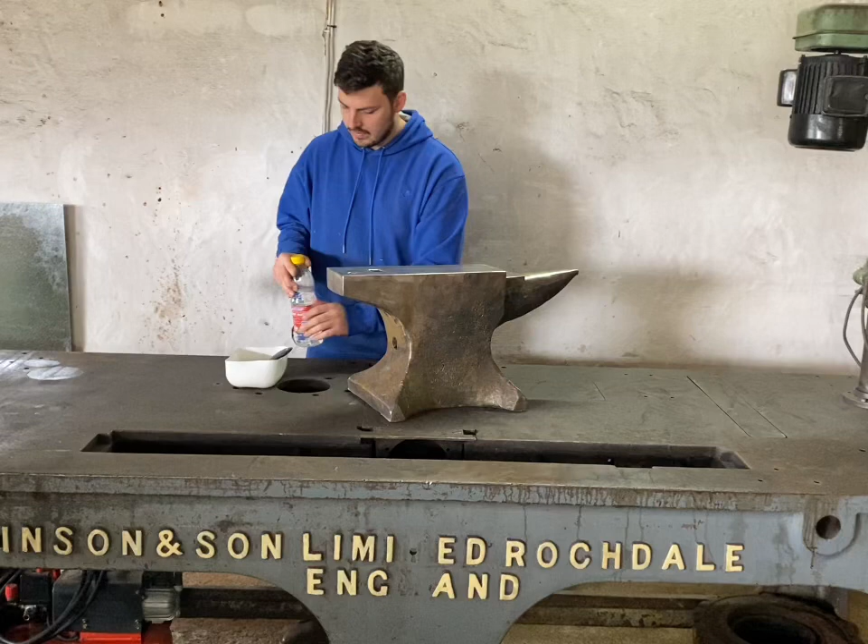My name is Kyle, and today you'll see the product of about 6 months worth of work. This is a Joseph Wilkinson anvil, and it started with me looking like this. So if you want to stick around and see how I accomplished this task, you're welcome to.

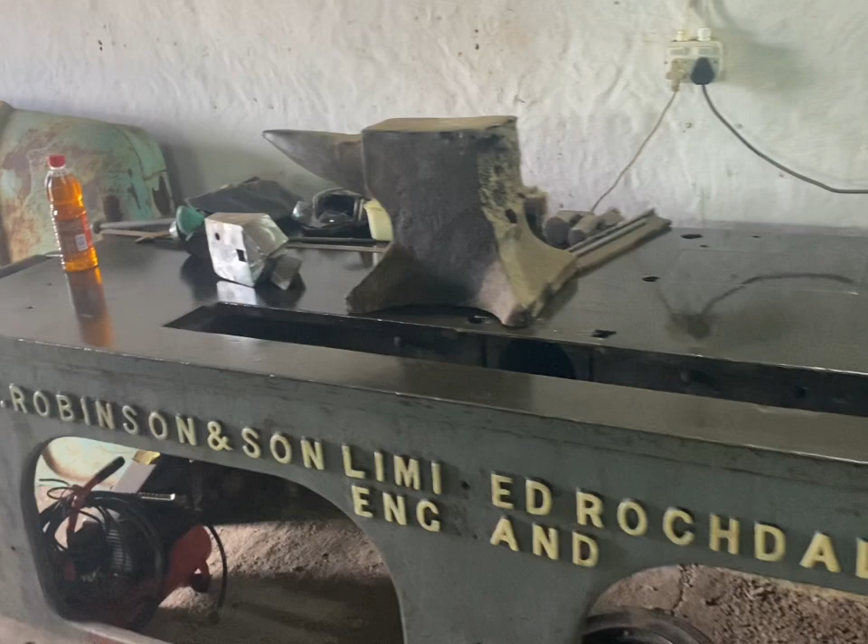So the table is all oiled, and this is 3 days later, and it's fairly dry. It's a little bit gummy in places still. You can see my fingerprint there, but can't wait any longer. So I have a little bit of time. I have an hour now before we finish work, so I'm going to just start to grind out all of this and prep these surfaces for welding just with a small grinder. I'm not going to do this here because this will require the big grinder, but I'd like to just see. I have an idea that there's some delamination in there, so I'm going to just work a little bit and see what's going on here.

I've got this deep crack. There was a crack that ran back here, and I've got that out now. But there's this very deep crack that's running from here, it's on this side here, and I've been trying to grind back to see if I can get rid of it, but it's actually now chasing back like that. So I think what I first suspected, I think that this whole piece is basically broken off underneath on the wrought iron. So I'm going to cut it back now here and then see if I can lift that off.

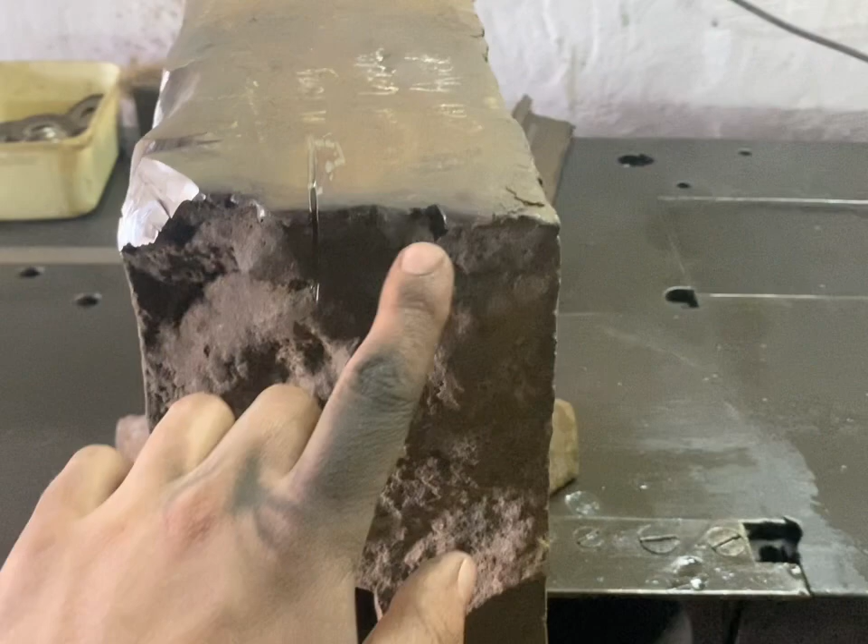This is the worst side here. This side, it doesn't look like there's too much delamination. It's just obviously broken edges, cleaned up over there. But yeah, this here has to come out, I think. So that's what I'm busy trying to get out now.

What I've done is I've cut through the faceplate there and there, and I've cut to the top of that crack over there and to the bottom there. So I'm hoping now if I chisel it from here, that part's going to pop out. I've never done a big one like this before, so we'll see how this goes.

See, it's definitely starting to pull forward. There, it's cracking, see, so it was all the way down there. So you can see how it was cracked on the wrought iron. The faceplate that was welded to the wrought was the only thing holding it on.

Now I'll just carry on grinding in here until I see that there's no more cracks, and then I'll be sort of happy here. But I think I might even have to come down a little bit more until about there. So I'm going to try and see now, because I see another crack. I also see that the crack is running quite deep in there, so it might be that this whole piece has to come out. I don't know yet. We'll have to obviously just carry on doing this and then see.

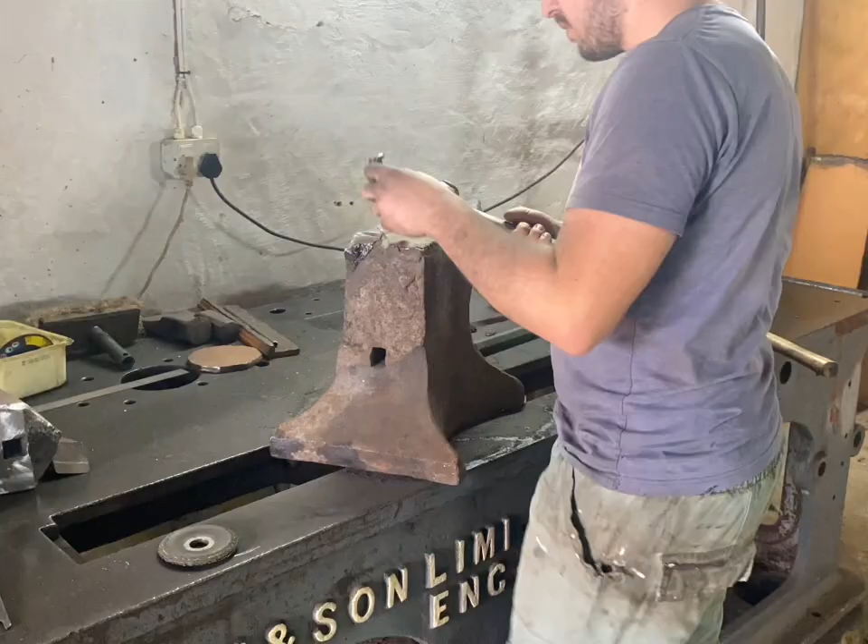But I think what I want to try and do now is I want to try and hammer in there to see if I can get this lifted off, even if it does mean that it peels off here, just so I can see how deep this crack runs. It seems as I was right. You can see there where it's starting to break away up to there.

What I did is I saw where I had cracks here, and I saw that I'd had cracks here, and I thought, well, it's very possible, just judging by the sort of angle of that break, and obviously we saw that there was a break in there, so I just guesstimated that the crack ran along like that. I don't have any special tricks or anything like that.

This is obviously a bit different. This is actually a break in the wrought iron. Normally it just has face delamination, whereas here the face is still bonded to the wrought. It's just that the wrought has cracked. So I don't have any special tips or tricks for you guys here. I'm just trying to see where the crack runs.

You can see now that it's separated a little bit, you can see where the crack runs. It runs along. It looks like it still even comes back into this more. So now what I'll do is I'll follow that crack over there. I'll get this off and I'll see where that crack is, and I'll follow that back. And I'll just keep on following it.

Sometimes, I know there's a guy in Canada that does this, half of the face comes off. And that's the thing with restoring anvils, you just never know what you've got. But if you want to do it properly, this is how you do it. So obviously all this has to be now built up with welding. It's a lot of work. Once you get going, it goes. But yeah, some guys are not cut out for this type of thing. Well, I love this. This is awesome.

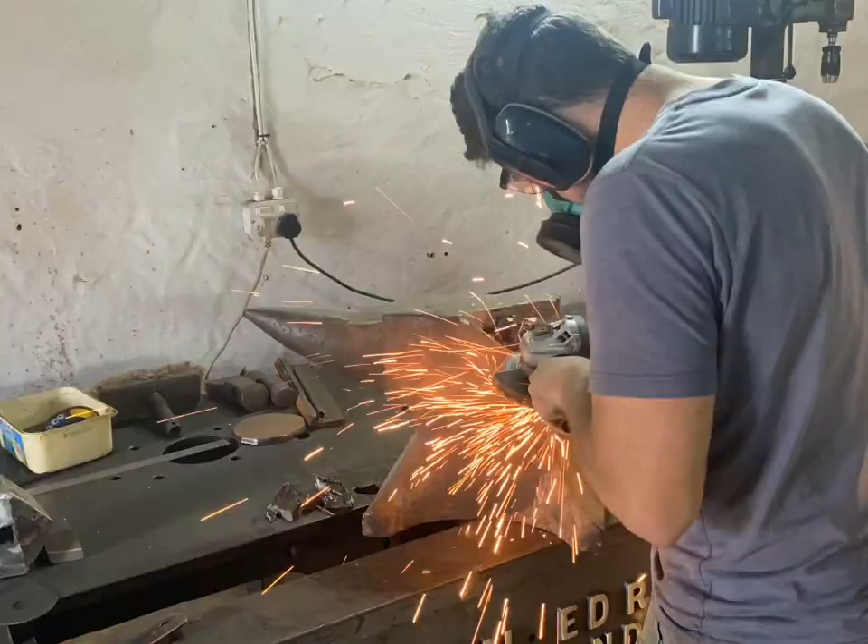Okay, so I think the last time you guys saw this, it was sort of around about there. I chased cracks. Not only cracks, because this is wrought iron, there's this flux, I'm guessing, that they use to forge this stuff, and I'll just grind and grind and grind to try and get rid of that flux, and it just seems that it goes further and further down. So I'm already, what is that, probably 3 inches, I'm guessing 75 mil down into the body of the anvil. So I don't know how much further I must take this.

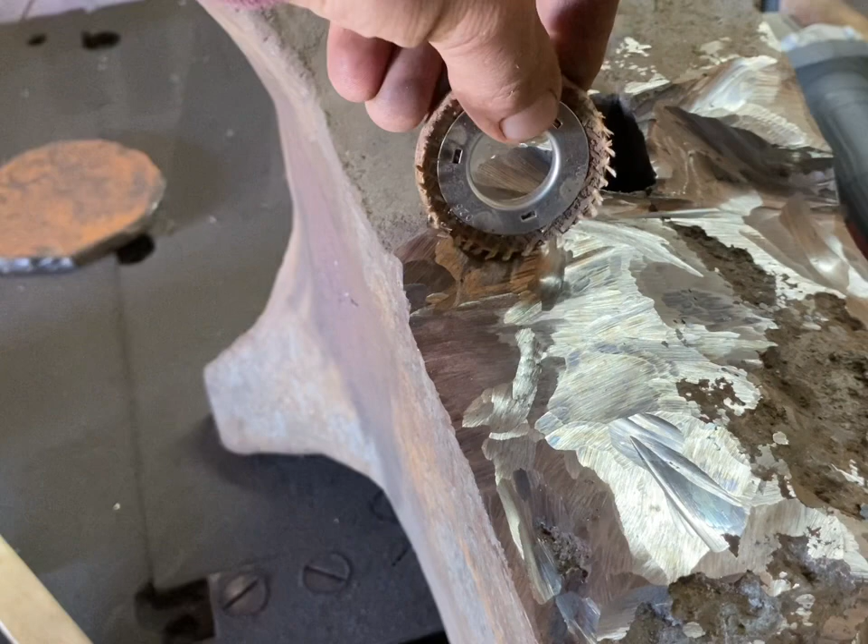So you'll see I'm using a whole lot of small little grinding discs, and I use them until they're that size. And the reason is over here in these little spots, that grinding disc fits perfectly in there if you work it back and forth. Whereas on a bigger disc, you have to take out a lot more material in order to get to the tight little spots. So like in there, you just put the little grinding disc and you just work it, and that's the reason why I use them. Same as over here, I'll use a small little grinding disc.

Just a quick one. What I'm going to be doing is putting this upright so that when I cut, I'm using the weight of the grinder to cut. I don't have to hold the grinder horizontally. I'll be cutting down vertically, and I'm going to be climbing on top of my table and just slicing it down. For those of you who say watch your back, I am aware of that. This is just going to be the easiest way. On the table, at least, I don't have to pick it up and down off here. Much easier for me to just climb up there.

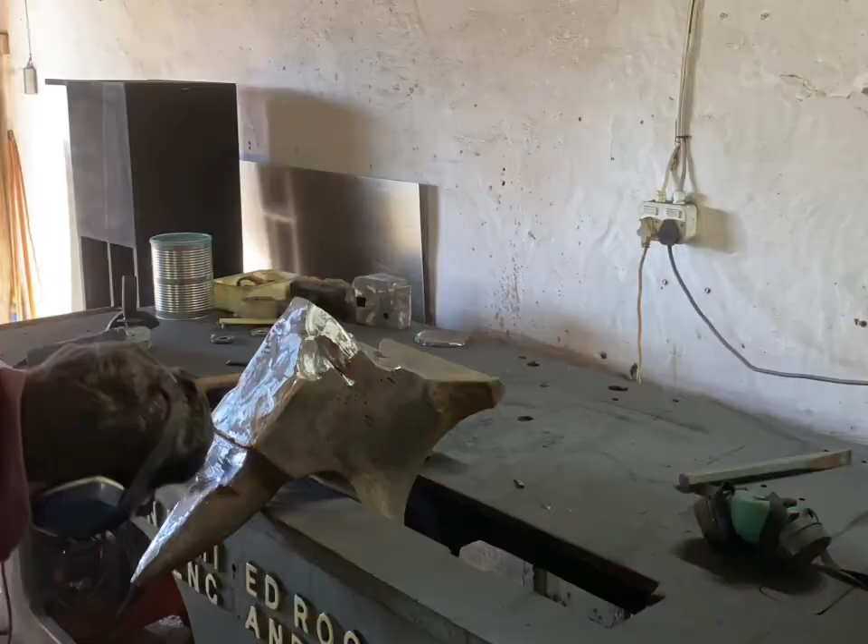Okay, so there you have it. That was a long process. That took me probably about 2 hours. I tried to work this one out a little bit more. I've got to the bottom now, but I'm battling to get in more, so I might just use a die grinder and clean that up so that it's clean steel. I don't want to carry on because the big grinder takes a long time, since I have to remove all this material in order to get in there, and my small grinder can't get there. Finish that up with a die grinder.

The face, I had cracks running inside the faceplate this way, so I just ground until they're gone. Over here I had cracks running down, so I ground until they're gone. And then the horn and the cutting table, that's all wrought iron. You can see there is a slight crack in the wrought. There you can see it. I'm not going to worry too much about it though, because that gets built up with normal mild steel. This doesn't get worked very hard. It shouldn't. So I'm not going to worry about that, because it doesn't look like it's too deep, and there's no point in me going down too much over here.

A little bit over here, those are just the bottoms of the chisel marks, so I've got to go down there a little bit more. But other than that, she's pretty well prepped. A lot of prep work. If you ever ask whether it's better to restore an old anvil that's badly damaged or just buy a new one, it's better to just buy a new one, or a less damaged one. But I do this because I don't see the point of putting this thing on the scrap heap. It hurts to think that this was made in the mid 1800s, and I don't think things that old should be chucked on the scrap heap.

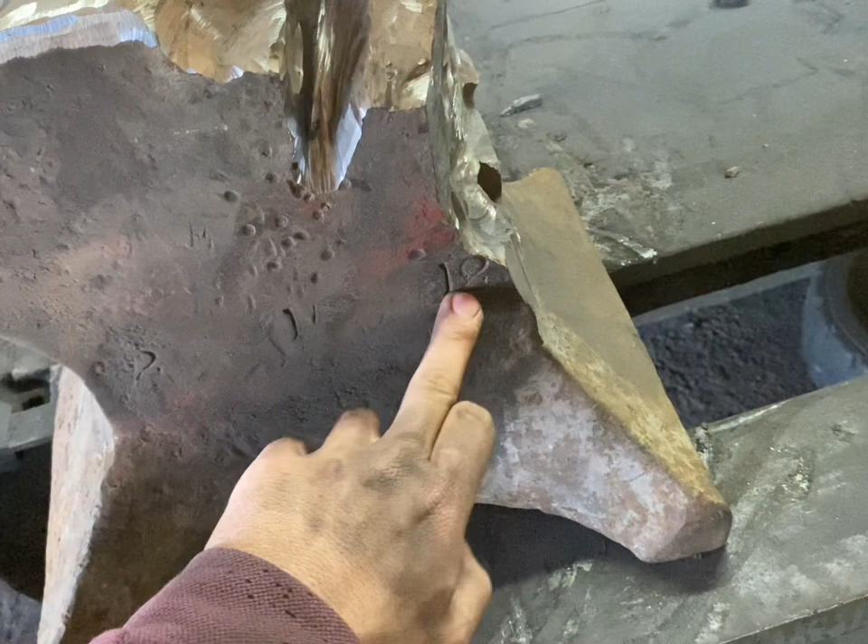But what I'm going to do is I might just leave that. And then if there's a bit of porosity there, so be it, you know, it's not structural. It's always best to just have absolutely as clean a steel as you can have for welding, because any impurities in here will obviously just cause problems. So, but yeah, that's it. Happy with the way that turned out.

How it's going to work is this will all be built up with mild steel, normal MIG wire, your standard mild steel MIG wire, because this you don't want to be hard. If you are going to be chiseling and stuff on it, you don't want to keep on blunting your chisel like mine is from trying to chip out on tool steel stuff. So you don't want to use hard facing here, just use mild steel. It'll serve its purpose. From here on, obviously all this will be built up with mild steel till the top over here. I'll explain that just now, and then all this building in here, all mild steel.

Okay, once I've got all the mild steel done, I'm going to be left with this stuff over here, whatever's going on here on the face, as well as the new heel. This, I'm going to try a new method. My welding supplier said that it's a good idea to do this. I explained this earlier on in the video, where this is quite hard already, but that is normal mild steel, so that's quite soft. All the building work is going to be mild steel, so that's going to be a huge chunk in here where it's going to be soft.

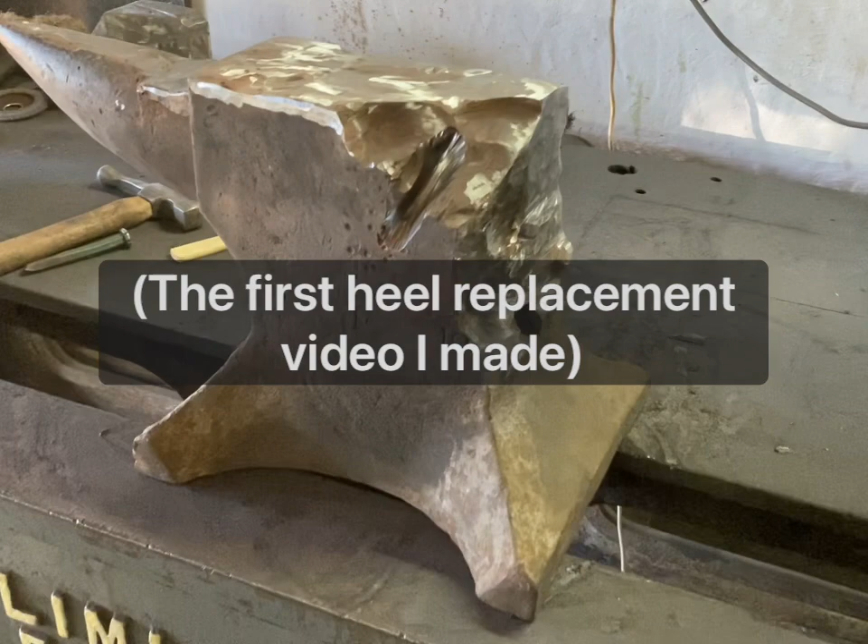So yeah, this anvil is going to be a little bit different to the last one I did. Obviously there's much more damage over here. This is a bigger anvil. I think this is close on double the weight of that other one. But there was a hell of a lot more damage. The other one was basically a clean break. I cleaned it up, there were no cracks, welded the new heel on. Whereas this one, I had a lot of weirdness going on here, and there's a lot of cracking. I think this could possibly be an earlier one, or the wrought iron quality is worse, because the wrought iron over here, there's a lot of cracking going on.

So I don't know. Wilkinson anvils are generally very good quality, but I don't know what they had access to back in the day. No judgment from me. They did bloody good work. 100 and something years later, their anvils are still around. We take it next door and start tacking everything together and laying it out and seeing if I'm happy with the shape.

Okay guys, this is the next day. Just in case you're wondering what all the writing down and measuring was about, I was just getting a halfway mark on both. The horn, I did double check it. The horn is in fact the middle of the anvil, and then I've drawn a line all the way across the halfway mark. The anvil is, how much bigger is it here? I think it's almost 8 mils bigger. Don't ask me what that is in inches, but it's 8 mils bigger on this side than it is on this side, which is fine.

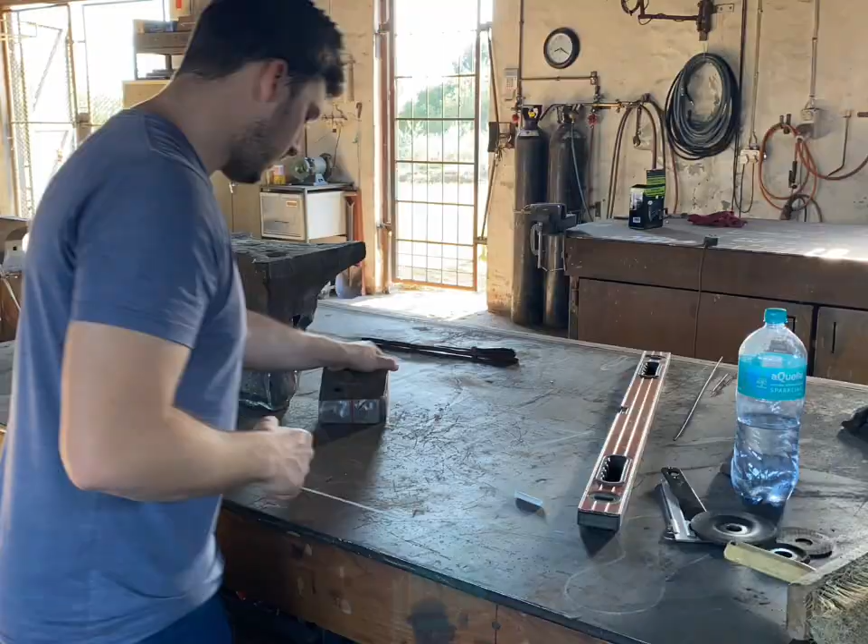Okay, so I'm ready to tack the heel on. What I was doing is I just took some scrap square tube and welded myself a square that I could obviously weld on and get all messed up. I just tried to see at first the gap between; obviously it's fatter here, the body, than it is at the face. So I was just trying to see the gap, and I thought, actually, you know what?

Let's rather make this level on the feet, because then once I grind the face, all I do is put my level on the face and check for level this way, that way, and then I know if I'm square with the feet. So I thought that'll be a good idea.

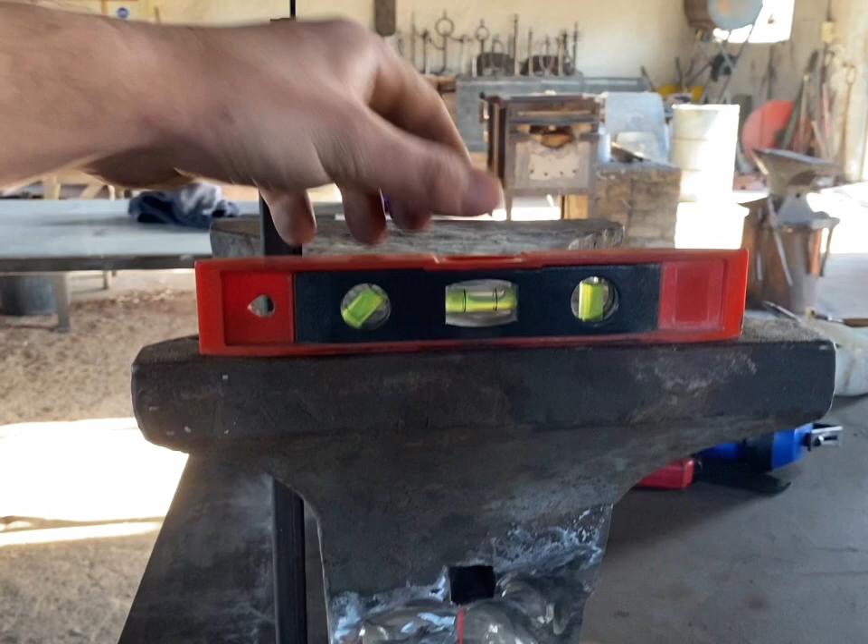So the feet are off, obviously, of course they are. This one is ever so slightly off that way, and this one is ever so slightly off that way. So I've sort of tried to get them in the happy medium. This is off, but let me show you. If I take this little spacer out, then it is absolutely perfect there.

And then that's perfect over there, but then this foot over here is out quite a lot. So that gives me two options. Either I could space it so that it's right in between in the middle, or I would have to take this foot down by 4 mils on the outer edge, which actually might be a good option, because then I've got this thing perfectly level. Let me give it a little bit of thought.

I think I'm going to just grind this foot down. There you go. See, this is why I talk to you guys.

Okay, so let me just think about this quickly. I think I'm going to mark from here to there, get a level line, and then see how much I'm going to have to take down on this foot. I've done this on one of my other anvils before, where the foot was way off, and I had to grind the one foot down. So let me just do this quickly.

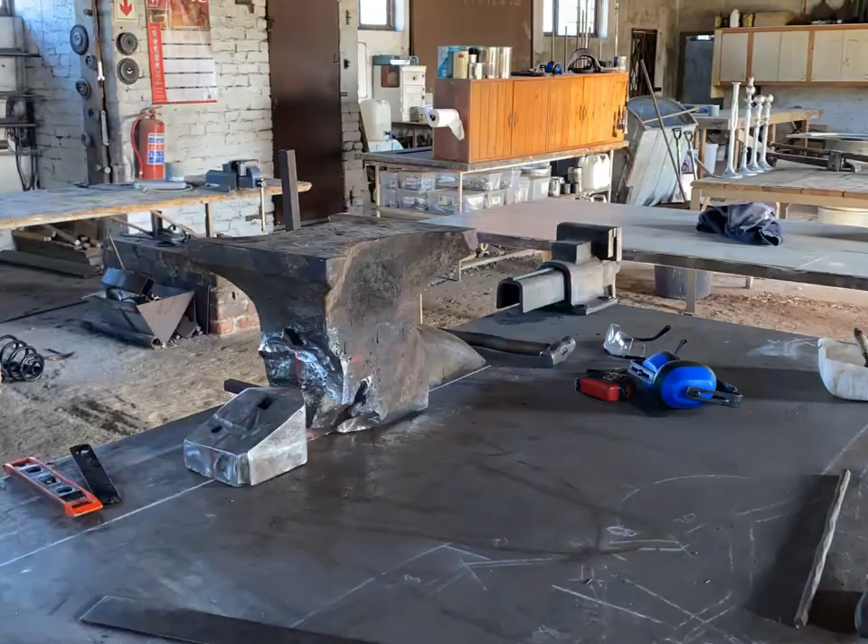There's the anvil from the top. See how much welding I've got to do there. Okay, so I just thought I'd show you quickly what I've done here. I made this little tool. It's basically just a piece of pipe that I've cut wedges in, and then I shove a piece of chalk in and break it off, so then I can trace along here. So anyway, I traced all that.

Took it down to the foot. The waist. What am I talking about? This is the important part.

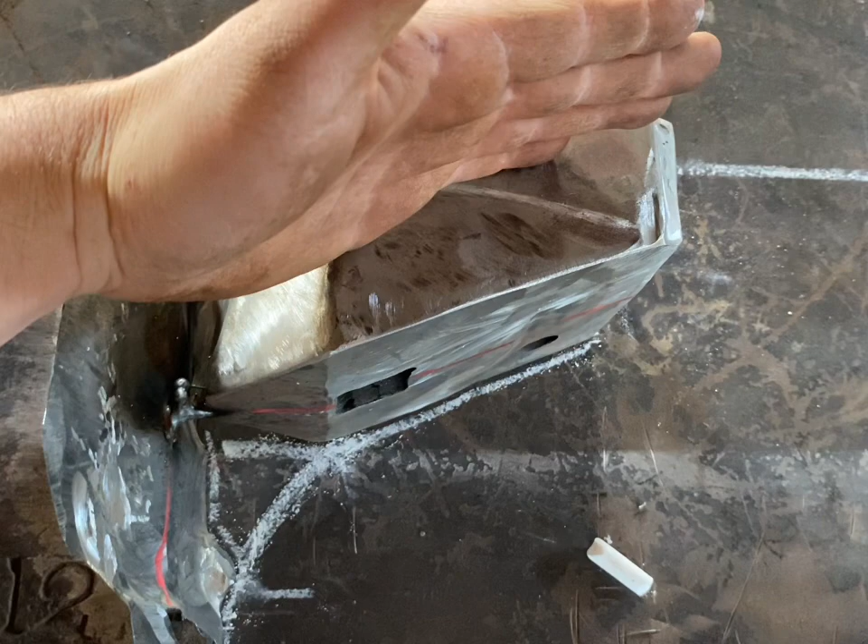Okay, so what I've done here, I traced up to here, to where it breaks off, and then I've just drawn myself a little line, because that's obviously the shape that we're going for. Remember, we cut the heel according to the sketch that we had on the big cast iron table. So I marked that, so I know that this shape is roughly what I need.

I might need to just grind it slightly in there to make it more rounded, but this shape is roughly right; that point over there is correct, and that point over there is correct. We might just need to take a little bit out there to give it that rounded, nice smooth look. So that is what needs to be filled.

Now, I have two options here. Either I can just start preheating this thing and welding it. As you can see, I still need to just grind that out. Haven't done that yet. Okay, so I can just preheat this thing and then start to weld.

Or what I can do is I need to chop this block down by 10 mils over there. So I need to at least sharpen that angle quite a lot and then bring it to about there, like that, you know. So I need to chop all that material off and throw it away. And then cut the heel off, preheat the heel, preheat this, weld that on. Then once that's on, weld it to the anvil.

Now, this is not very heavy, so I think that would just be sort of defeating the object. I don't know. It feels like I'm walking in my past footsteps here, because I try to do things a little bit differently with trying to escape so much welding. But at the end of the day, I mean, it's welding. So I think it's going to be easier for me to just start preheating and then just give it stick. Yeah, and then just fill all this up, because I have to fill all that.

So that's my thinking. Obviously, that over there, I think what I'll end up doing is I'll just come in with a big cutting disc, and I'll just snip that down and then clean it up. You can see over there, I've sort of dialed in where the high starts. You can actually see, look at that, where I've been dragging around on my table, the high. That one over there and that one over there is also a little bit, but this one over here is much more so. So that tells me that my theory is sort of correct. There is a high spot in here.

So what I'll do is I'll cut down and then I'll just grind that out. I don't think I'll ever be able to get it perfect. I don't have like a surface grinder or something, but I'll get it closer than what it is now. But that will come after everything else. Yeah, today I need to focus on this. So yeah, fun times. It is now 9 o'clock.

So I think I'm gonna just give this one more tack. I tacked it from the back, so I'm gonna tack it in here. Don't worry, I can definitely see that there's gaps there. Like I said, it was tacked from the other side. So I'll just burn that in there now, get that nice. Yes, I do have a gap there so that I can get a full penetrating weld. That's the whole point of doing all this work, is so that there's no holes.

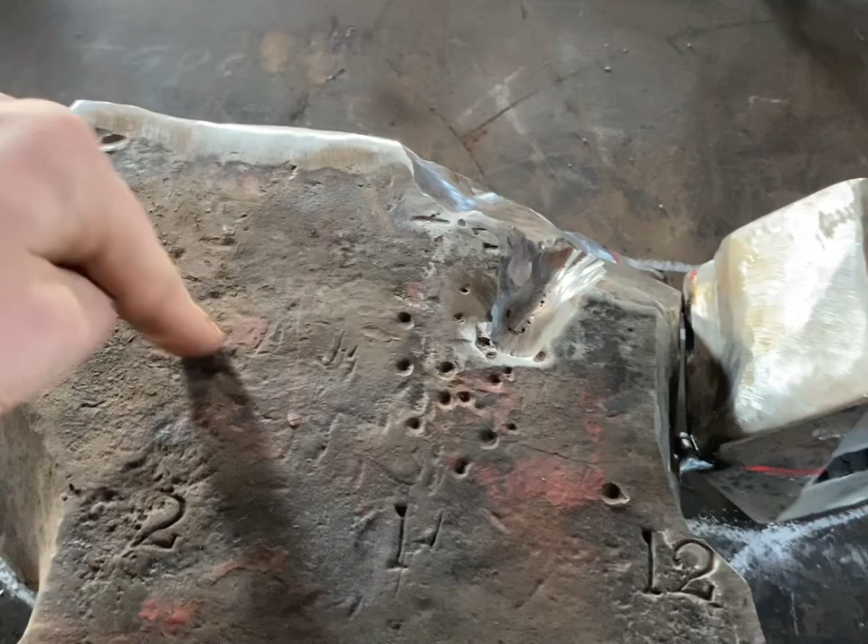You don't want any air gaps, as little as possible. On my welding, I don't want any air gaps. In this mass over here, guaranteed there are air gaps, as you can see, that are still in here, but as long as I can put out that my work is solid, you know what I'm saying? So anyways, cool. I'm gonna stop blabbing on. I'm gonna tack this, and then I'm gonna pretty much stand it up, get it set up on the table so that I can start preheat.

I want to just quickly show you guys what rods I'm gonna be using. Okay, so let's start with what wire we're using. This over here is just a new box. I've got a roll currently in my machine. This is just a 0.8 mil normal mild steel wire. That's pretty much the most basic wire that you can get.

Then second, we have this, which I've never used before, so I'm going to give it a bash. I've seen some of the guys in the welding group say that I can't use mixed gas, I have to use pure CO2. The only pure CO2 I have is food grade CO2. So if I really battle, I'm going to bring in my food grade CO2 and see if that makes it weld any better. But anyways, this is a stainless wire. It is a 309 buffer.

Guys, I'm not a welder. I can weld, but I don't understand what that is. So don't ask those type of questions. All I know is that I spoke to my welding supply store and I said, listen, I'm welding anvils. I said, they're wrought iron. He said, okay, that's fine. Do all your fill work with normal mild steel. Then underneath your hard face, do a 309 buffer, which I bought.

I will show you the settings on my machine. Last time you guys asked what amperage and what voltage am I welding at. The truth is, I don't know. So there my machine is. It's a 250 amp MIG. Pro MIG is the brand name. Your typical made in China type machine. I've had it for, what, 8 years now, and it's never given me any problems.

It'll give you the voltmeter and ammeter reading when I'm welding. Normally I just play with it. I know my machine. I know my car, I know how much I can go on an empty tank. So basically I just know my machine. I know that when I'm welding heavy stuff like this, thick stuff, I need to be around about there, 5. Normally what I do is I up my voltage slightly and then I'll leave my amperage about there. I might even go to 5.5 over there, and then I'll boost my voltage up to 6.

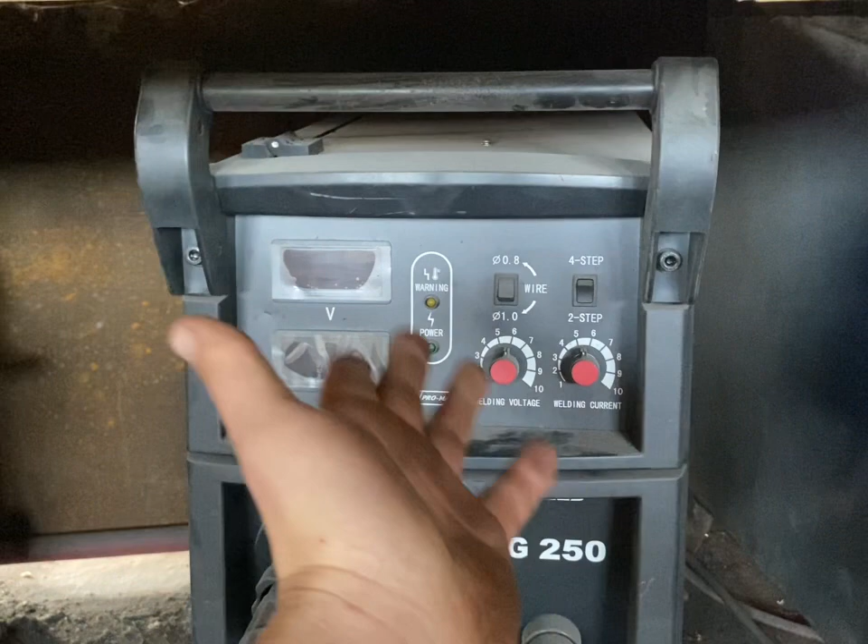Wire speed, guys, that's my controls. I don't know what wire speed it is. As far as I understand, it adjusts the wire speed accordingly. I have a switch over there to say what wire I'm using. So obviously I'm using 0.8. 2-step and 4-step: I'll be welding on 4-step because then I pull the trigger and it auto feeds until I pull the trigger again. 2-step is when you pull the trigger, it feeds. When you let go, it stops. Because I'm going to be doing a lot of building work, I don't want my finger to cramp, so I'm going to be going 4-step. But I'll show you all of that when I'm actually welding.

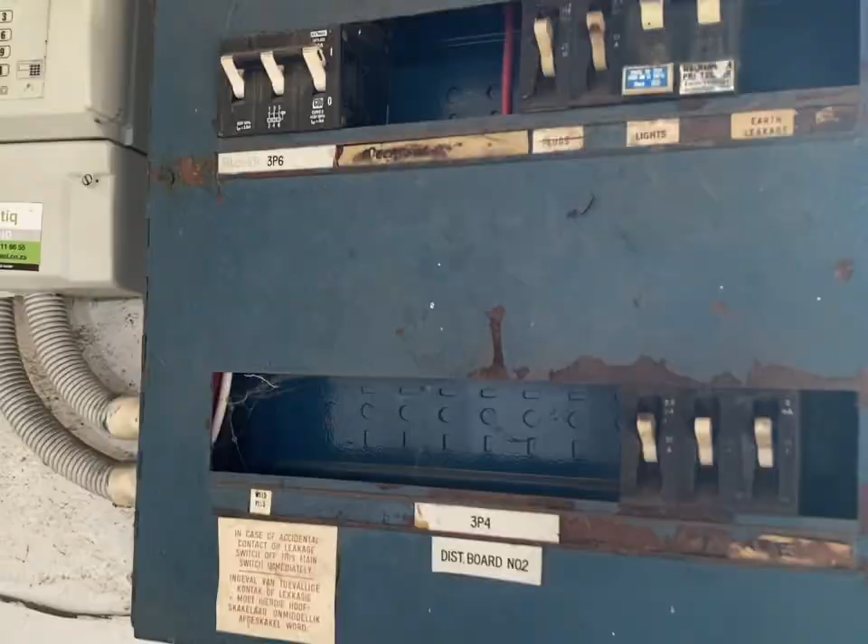Another thing I thought would be cool is showing you how much electricity I use. Because I'm here alone today, I have everything off. I don't have any lights on, nothing on at all. So I have 100 units of electricity. I think this is pretty much standard, so you guys will be able to figure out how many units you use. We are obviously 220 volt. I know in America you guys are 110 volts. I think the units stay the same. I don't know, you'll have to comment down below and tell me. So we've got 100.1 units.

Kilowatt hours. Okay, so I will video after all the welding is done, and then we'll see how many units we've used. Then you can figure out how much electricity costs in your area and work out the total cost of repairing an anvil in your area. Thought that would be quite cool.

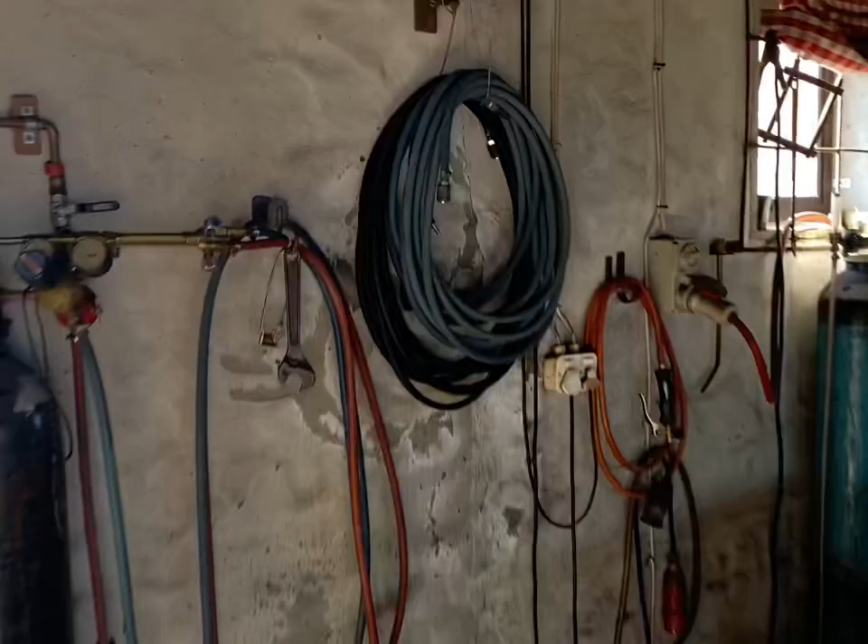For preheat, you can see we've got gas lines over here. Our gas chamber is outside, where we've got LPG gas, the big 48 kg bottles. For preheating my anvils, I have a hose like this with a male and a female clip on it. I clip the male side into this regulator, I open it up, there we go, I've got my gas. Then I plug this torch into the female side, and it's just your normal conventional trigger torch. I put it in a vise, and then I open the gas all the way. For measuring, I use a little digital gauge you'll have seen in the previous videos.

I'll use it again today, and that is how I measure the temperature. I want it to get around about 200 degrees. Keep in mind, obviously we have a crap ton of welding to do, so it is going to warm up. So I might warm it up to about 200 on the heel, because obviously it does differ,

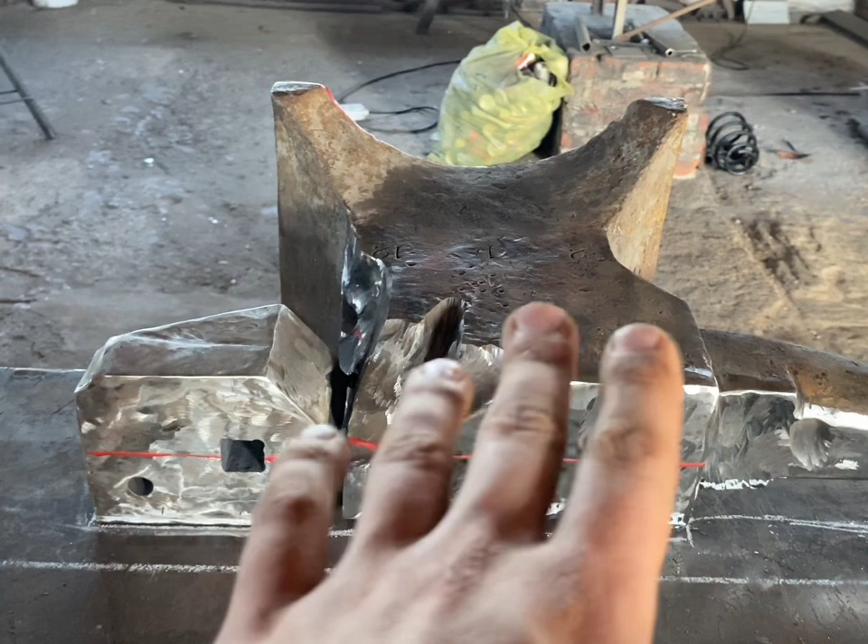the temperatures. When you're heating it up, the body is always colder because obviously it's a huge mass of steel. The heel and the horn heat up quicker. So I focus my flame on the body. Then when it's cooling, the horn and the heel cool off quicker, and the body stays warm for a lot longer, again, because of the mass. So I have to just keep that in mind.

So what I'm going to do is I'm going to heat up the body to around about 200. If it's like 180 or 170, it'll be fine. But the problem is that when I heat that up, the horn and the heel are going to get hotter than that. So I don't want to overheat the horn and the heel. So basically you'll see I always take 3 readings, 1, 2, 3, and then I just see what all the temperatures are, and I can't say to you that it's critical how much preheat you're putting in.

All I know is that obviously you need to preheat it because you need your welds to penetrate, especially into your wrought, really well. So yeah, even if I have to preheat the whole body until maybe 180, and then I just heat up where I'm actually going to be welding, and then I can start welding. Because once I start welding, then obviously all that heat is transferring into both pieces.

You'll see I might need to take a break here and there. I don't know if you'll see it in the time lapse, because obviously it's time lapse, but I will take a break if I see it getting too hot. Then I'll let it cool down a little bit, and then carry on welding. Generally, I don't really need to, because the heat transfers through quite nicely.

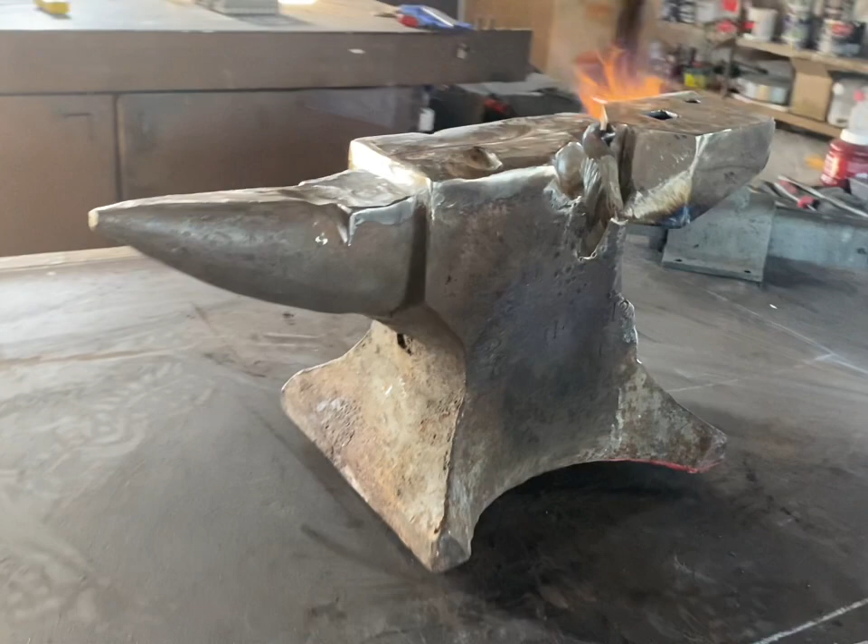Okay, it is a little bit hot from transfer, but I can still touch it, it's not going to burn my skin off. So I haven't concentrated any heat on the horn yet, because that'll be last. I will put a bit of heat on there just so that I don't get any major differences in temperature between the body and the horn, as obviously the horn is forge welded on, so there's always a possibility of breakage. Basically, I just keep on moving around like this. Letting the vise loose a little bit.

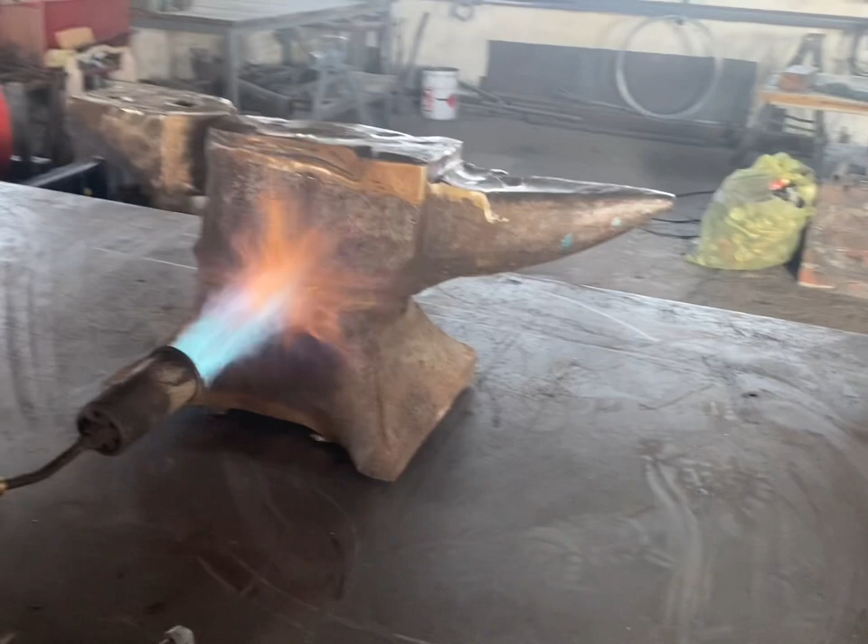There we go. Sorry, I'm trying to do that one hand. Anyways, yeah, I'll take a few temperature readings, and when it's about there, then I'm gonna give it a stick. So you'll see right at the beginning, it's the same as the other anvil. I'll do a pass here, and then flip it over, and then another pass, and I'll just keep on flipping it over so that the heel doesn't pull either way. Once I've got, I don't know, 10 mils worth of welding, it's not going to pull much anyway, so then I can start actually filling.

On the other side that I'm heating up now, we're about 140, and then this side we're about 160. So we are getting up to temperature. I think I'm gonna take it to about 180, and then I'm gonna start welding.

The temperature, I thought I'd try and show you guys. So that's ambient temperature, 24 degrees Celsius. Let me see what's Fahrenheit. Okay, so it's a 76-degree day today. It's quite warm. I am gonna test this in both. So let's see the body.

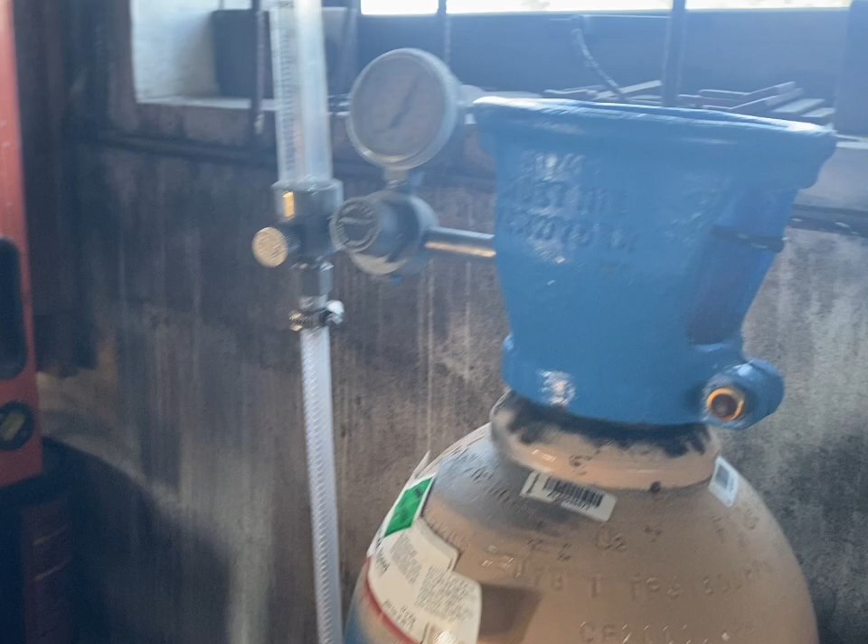What I also wanted to show you guys is gas. Okay, so normally when I weld, my gas flow is right around 10. You can see there, it's right around 10. I am going to boost it up to 15 just for these first few welds. I'd rather have too much gas flowing down

into the bevel. Because it's hot, obviously. Like I said, I'm not a qualified welder, so I don't quite understand the theory of how everything works. My idea is that the anvil is hot, so naturally it's going to want to push that gas up. So I'd rather just have more gas so that I get a good insulated weld, especially there in the bevel. Once I've started to weld, then it should be fine. But anyways, I thought I'd just let you know about that.

All right, I'm going to try and struggle with this thing now. Put my gloves on, put my welding coat on, and I'm going to try and struggle getting this thing down so I can start welding. Okay, this way you guys will be able to see my voltage and my amperage while I do my first pass.

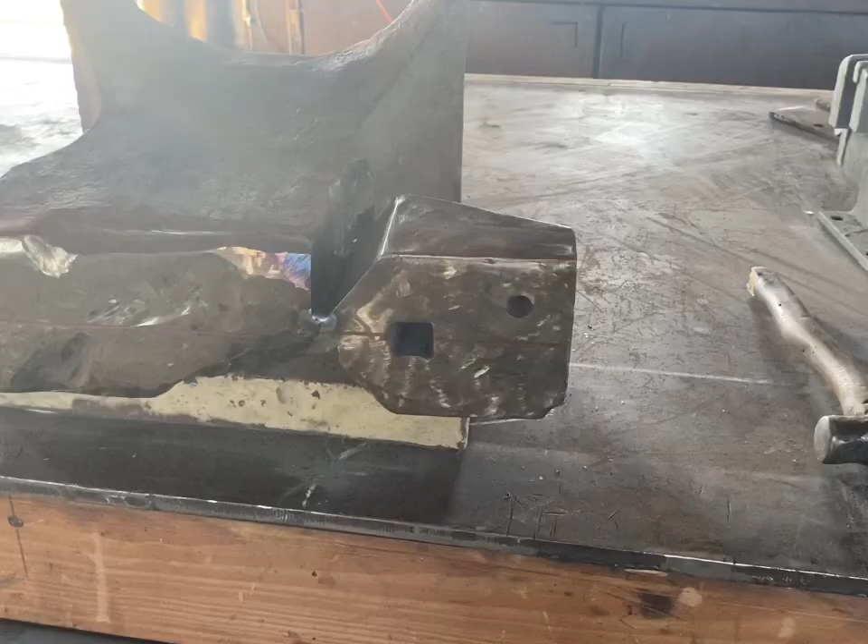Okay, so there's my first pass. Not great, but not too shabby. A little bit of porosity over there. I'm going to flip the anvil over now and then do the other side.

Thought I'd just show you what that weld looks like from the back. There you go. So you can see it did drip through a little bit. So now I'll wire brush it, and then I'm going to give it one on top. And from there, I can trust that it's not going to pull too much. So then I can start welding up.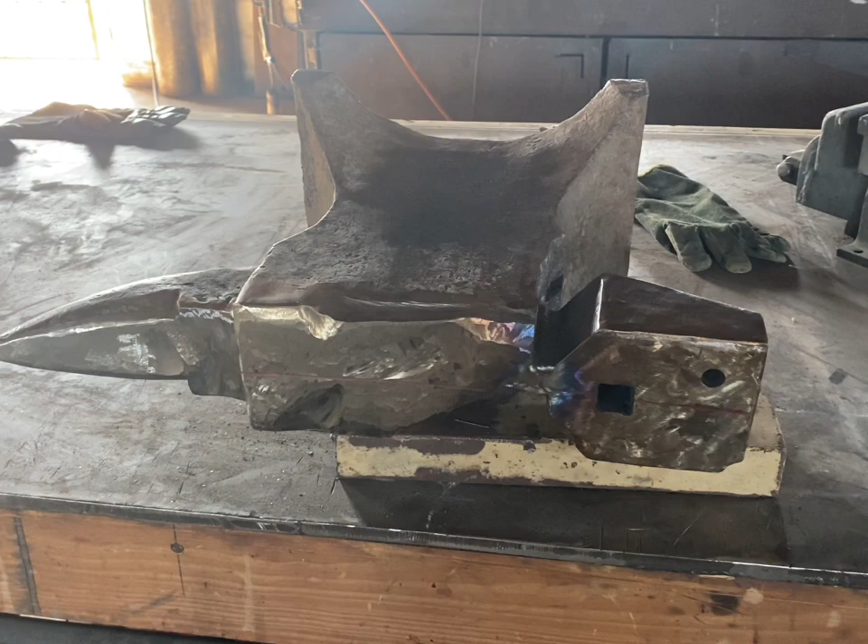So I'm just going to do little snippets in between. You can see the machine is welding really well at exactly the same settings that I had it earlier. Yeah, got about 20 mils now, so that's cool. I'm going to just carry on filling it up, and I'll just take little clips in between. It's pointless me doing this whole thing in time lapse. I'm just gonna kill my battery and the video is gonna be way too long on YouTube. Pretty much any of you guys that are wanting to do this know already how to weld, so I don't need to teach you on that.

All right, that's the one side done. As you can see, I built up the whole heel just by about 5 or 6 mils. I think it's about 3 or 4 passes, just because obviously the heel was quite a little bit smaller than the body over here. Sorry, the lighting's pretty bad. There you go. We have built up, and then the last, I would say 3 layers, I've just done a weave, just building everything up. So there you have it.

It's coming together. Now I've got all that junk to do, so that's probably going to take me a while. It's now 11:45, so that'll take me until the end of the day basically. I have to do that first before I can do this, but yeah, that might have to be tomorrow's job.

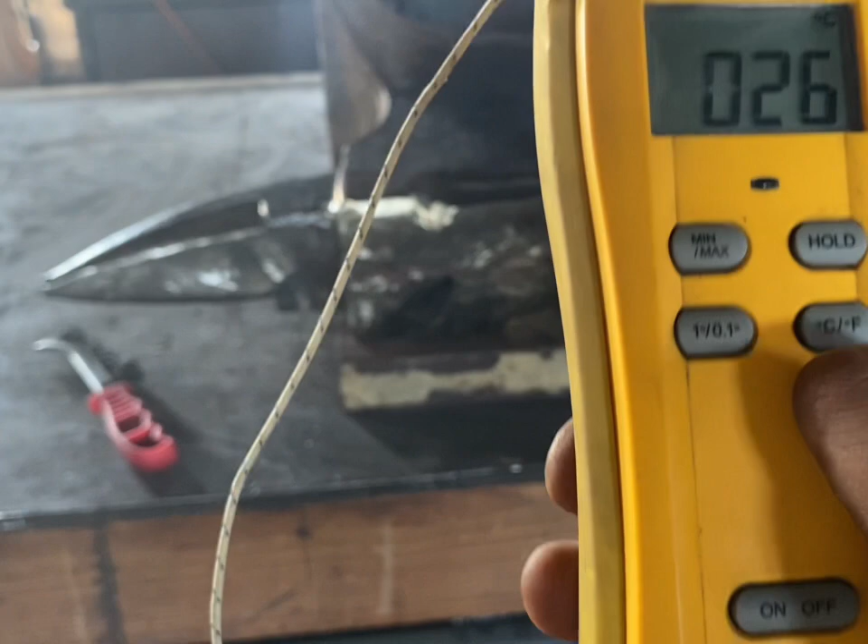Okay, so here's ambient, 26 degrees Celsius or 78 Fahrenheit. So the heel, like I said, is quite hot. I don't need to really watch my heat on the heel because that is 260-ish, 265. So the body of the anvil is actually quite cool, you see. Have a look on the horn.

So I went to have a little bit of a lunch break, and I came back and I did a few welds, and they're fine. The welds are taking well, but I thought it just felt a little bit cold. You can sort of tell the way your welds are adhering as opposed to the way they were before. So I thought I'd just put a little bit more preheat in the anvil.

I did measure the temperature, and it's around about 100 all the way throughout. So I want to get it up maybe just by about 50 degrees, and then I'll carry on welding, and then it'll obviously keep its temperature. So, but yeah, there it is.

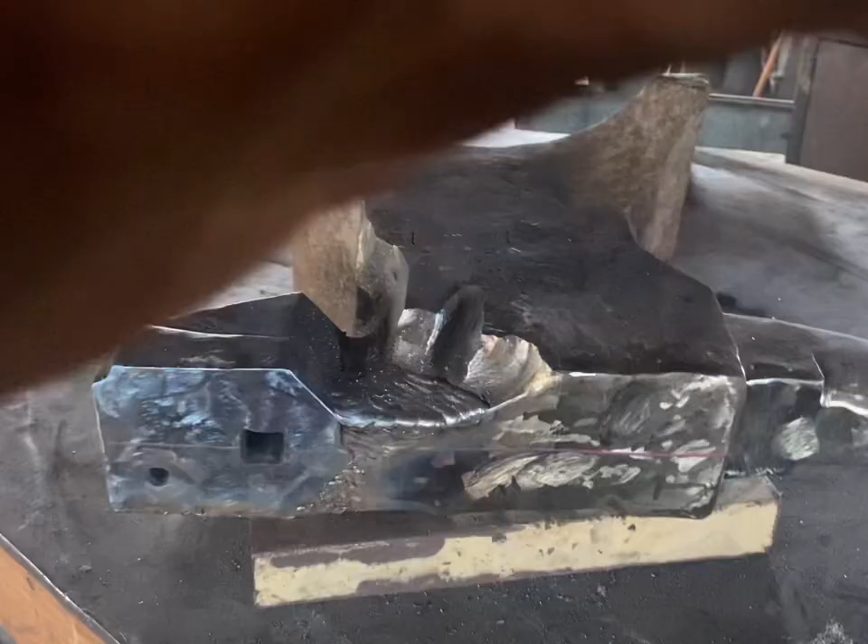Starting to look like an anvil now. Once all that's filled in, it'll really come together nicely. It was the same on the last one. It sort of looks like, what the hell's going on here? As soon as that's filled up, it changes the whole perspective. Let me just see. There you go.

Okay, so we're getting there. As you can see, I've filled in there, and then I'm just trying to keep it all at the same level throughout so that I'm building up all together. I don't know if that makes sense. The lighting is pretty bad here, but basically I filled in there, and then I had a hollow here. You can see how deep it went there. So basically, I've just started in the bottom, and I've filled up.

So now I can start, do a pass there, and then just fill, and then obviously over here I just weave, just to fill the gaps. So yeah, I don't really have a plan here. I'm just taking it as it comes. Obviously I need to get the metal up to that level, I need to fill up there as well. So that's basically what I'm heading for. I'm just throwing in steel and making sure I'm working up evenly and I'm not leaving any gaps where I won't be able to get welding at a later stage.

So this is how we're doing so far. Just filling it up.

Okay guys, getting there. Sorry, I know this is a little bit different to how I filmed the last one. I see absolutely no point in trying to time-lapse this. I'm literally just welding this in there, but as you can see, it's going in really nicely. I filled up that big gouge. I can weld along there and then just go. So that's what I'm doing now. Just made this a little bit easier for myself.

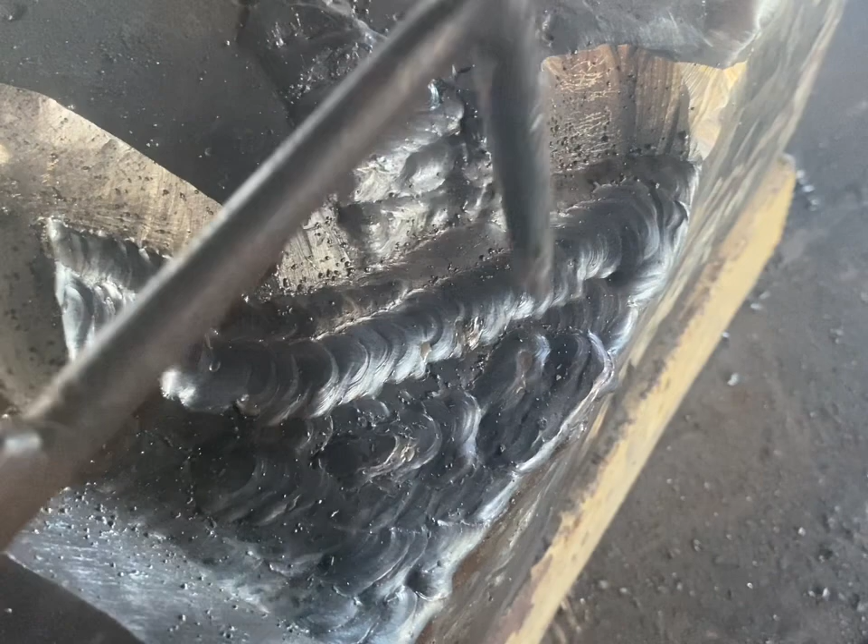So you can see on the wrought iron, I do get a lot of this silica stuff over there, so that's why I got my chipping hammer. So after every pass, I just go and I try and remove it. It doesn't mess with the welds too much, you can see it there. It melts, but I just like to try and get rid of it because obviously the cleaner my welds can be, the better.

Alrighty then, the heel is on. There you have it. That was a crap ton of welding, I won't lie. Wow. It is now 4 o'clock. I'm packing up to go home. It's very hot still, obviously, just finished welding. So I'm gonna see if I can get one of the guys from next door to help me put this in the sand so it can slow cool overnight. And then in the morning, I need to now do all of this, pull all that up. So fun times ahead.

So went next door, no one there. So there's no way that I can get this thing off the table myself. So I just laid it down, shoved sand underneath it, laid it on top and covered it up. I think what I'm going to do is just get some empty Nan tubs, formula tubs, fill them up with sand, and then just plunk them on top of each of those feet. I think I'll do that. I'll take a pic when I'm leaving.

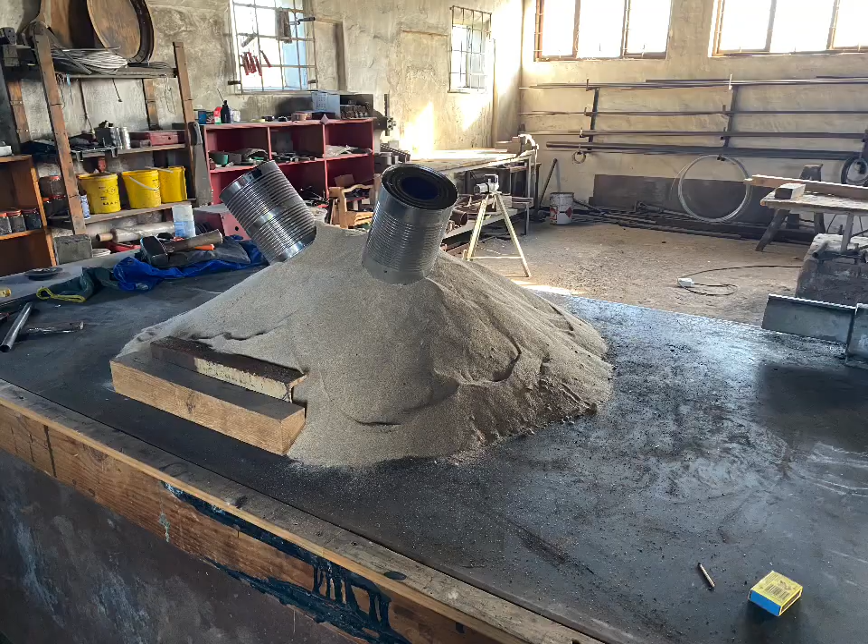Okay, so that is the first pass right throughout. Now it's just full. What I did is I just did a pass over all the wrought iron just so that it adheres nicely, and I stood it up like this so that I can get it to, you know, really settle into that wrought and bond nicely.

Now I'll lay it upside down again. I think what I'll do is I'll build this up a little bit more, and this hollow here, you know, it's quite a lot more hollow there than it is that side, so I'll get it about the same, and then we can just spin it upside down and do passes again.

So finally the inevitable happened. I ran out of wire, so there's a new fresh roll of wire that I've just put in. So yeah, thought I'd just quickly show you guys how this works, and then it'll come out of there. There it is. Now we just assemble the torch again and we can go for it.

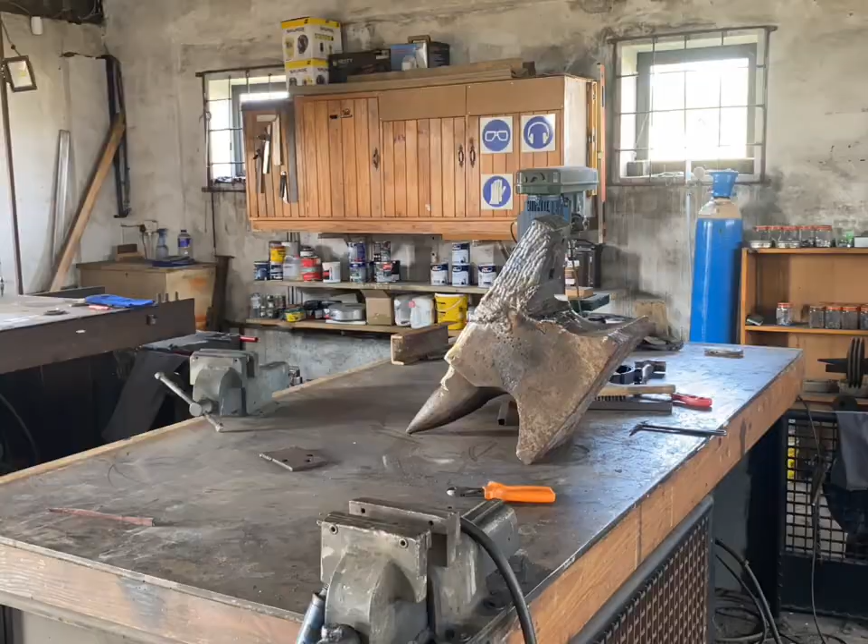There's no easy way of doing it. I'm just trying to work as symmetrical as possible. So like this was lower than that, so I just try to build this up so that I can run straight passes, because obviously the more straight passes, the easier, the quicker. So around about halfway there now. You can see this side where I've built up all of that already.

Now what I'm doing is I'm just doing 1, 2, 3 passes, and then I start up again here. I do 1, 2, 3, 4, 5, 6. So yeah, I do 3, and then I start at the top again, and then I do 6, and then all I'm doing is I'm raising it up like that so that I'm building upwards, you know.

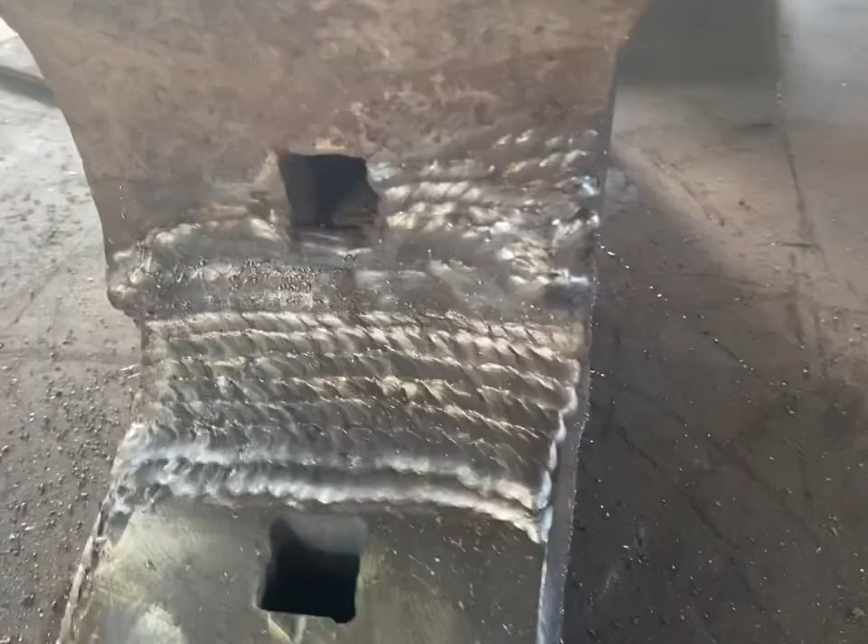That's how it's looking. It's definitely going. I'll get this finished today, but I'm not going to touch the face. It's quite a bit of welding this. Okay, so this is it. I've tipped it up right now, so I'm going to do exactly the same as what I was doing there. Yeah, so I'm going to do 1, 2, 1, 2, 3, 1, 2, 1, 2, 3. So I can build this up like that, and then we can start getting rid of that corner.

So we're definitely starting to take shape. Starting to look more and more like an anvil. What I'm going to do is I'm going to do 1 bead there, and then there and there. 1, 2, 3, 1, 2, 3, 4. So start in the middle, do 1, do another 1, 1, 2, 1, 2. And then that way we're now building up in the middle and then spreading out that way.

Alright, so all the filling is done. Now, when it's cool, I'll grind that flat, because as you can see, it is higher than the face. So I'll grind down in there and then preheat again for the last time, and then weld the stainless in and then hard facing, and that's it, done. So this genius right over here forgot that I have to still build up this horn and the cutting table.

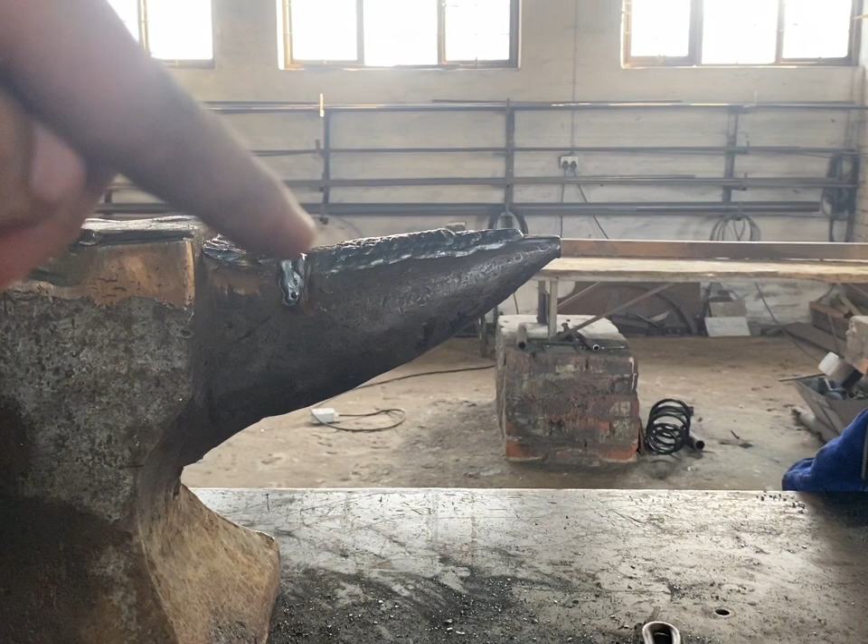Cool, so that's that. Have a look from here. We'll grind that off over there to match the horn, match the beginning of the horn to the end of the horn, and then grind that there on the cutting table until it's flat.

So yeah, then I had to build this corner up because that was quite far gone. Doesn't look like much now, but as soon as you start grinding it, then it starts taking shape quickly. I'm gonna put it in the sand now overnight, let it slow cool.

So what I've done is I've made a template of the anvil just by lying it over and putting this piece of cardboard underneath it. I've tried to just sort of freehand and then do that, like that. But I was getting a lot more material to remove this side than I was this side, so I thought, you know what, I'd rather just double check it.

So I made a template of this side because this is the side that obviously has the least amount of material. So this is the side we can't remove as much as the other side. So whatever we do, we want to reference it to this side over here. So I just made a template which takes me to this, and it came down like that, and then almost at that sort of angle.

That is the handling holes. So I've marked them both sides. This is the horn on this side. So I've just quickly taken a template like that, and I've just sort of angled it right to the edge of the heel. So now what I'll do is I'll cut this out with the scissors, lay it on both sides, mark this over here on both sides, and then I'll know exactly where I stand.

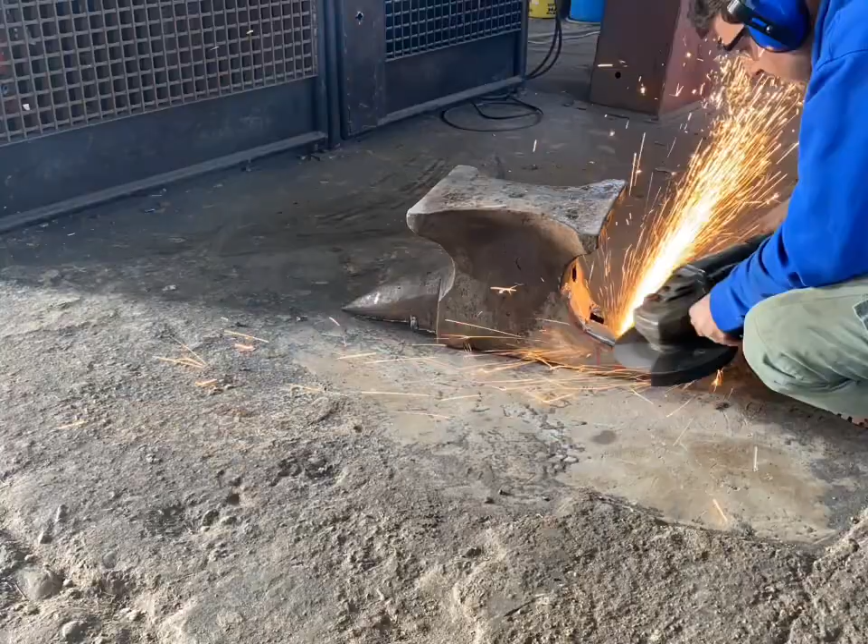Okay, so I'm pretty happy with that shape. That's quite nice. I've taken all the Sharpie marks off except for that one because I have to build that a little bit over there, and then I have literally one bead that I need to do in here. Let's just do one bead in there so that's fine. Doesn't have to be done, but why not? And this side is looking cool too, so there we go.

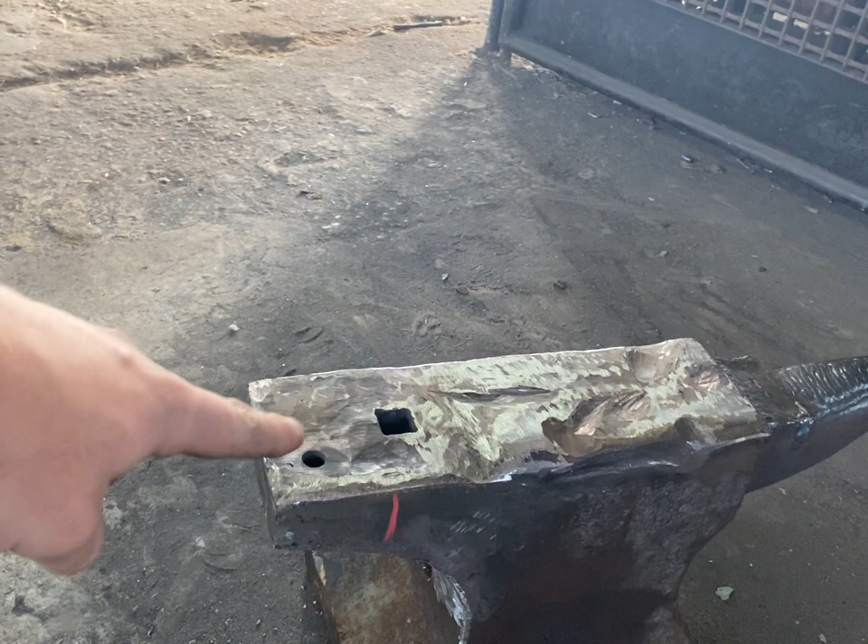The reason why I've done all the grinding first here is so that when I preheat to do the face, if I did need to do any fill work, such as this one bead and this over here, then at least I've got the preheat to do it. If I finish the anvil up, which I found last time, and then I have to do a little bit of filling after I've ground, it's another preheat. So I thought I'd rather do the grinding first, then I already have preheat, so I can finish up whatever build work needs to be done.

It's been well over a week now since I welded on this anvil. We've had quite bad load shedding, which is our scheduled power cuts. So I don't have enough time between the scheduled power cuts to weld the face. And the generator doesn't power the welding machine very well. So yeah, just waiting for better schedules to come out, so it'll allow me enough time to weld everything that needs welding.

There's a little bit over there that I need to build up, and then it's just the top, which I need to do with that stainless wire, and then I need a hard face at the same time. So I need to do the stainless and the hard face. I'm just waiting on that. Everything else is done. It's sanded. The horn is done, sanded. This is done, finished. So that one's done.

But what I thought of doing is you guys voted that I do this one of my dad's next. So I brought it in. There's not much to do here. So I thought maybe while I'm welding on the other one, I'll preheat the other one first. Then while I'm welding it, I'll preheat this one. And then I can just weld up this, because I don't need to do any mild steel work on here except for the horn, or the cutting table.

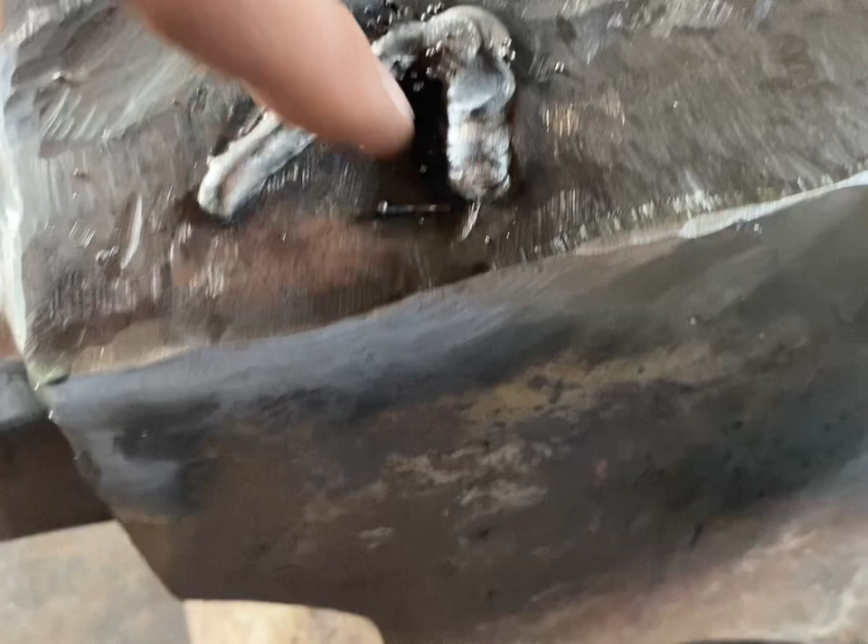So that was my first attempt over there, and that was my second pass, and that is my third. So I'm quite happy with that. That looks nice. It's not welding too high. You can see there, that was building up a bit too high. I'm gonna have to take down a lot there. That is welding quite nice and flat, so I'm not gonna have to grind too much before I hard face.

What I'm gonna do is I'm gonna fill in these hollows now, and then I will do the whole face with this stainless wire. And then after that I will then do the hard facing. You can see here I have to fill all that up with this stainless as well, so I'm just going to give it a little bit of strength.

And yeah, this over here, mild. So I will do this last. I'm just going to run a few beads of mild over there. I'll just do that with my dad's machine, which is in there. I'll just run an earth across and then just quickly done, mild, finished. But that'll be right at the end.

There's still quite a dip over here. I've marked it with chalk, but what I'll do is I will run one bead and then the bead on top. But it's not quite deep enough that I can run beads here. So what I'm going to do now is I'm just going to quickly flat this with a grinder, just to take down any super high spots, get it around about the same, sorry my angles are a bit weird here, around about the same level as the rest of the face. So not a hell of a lot.

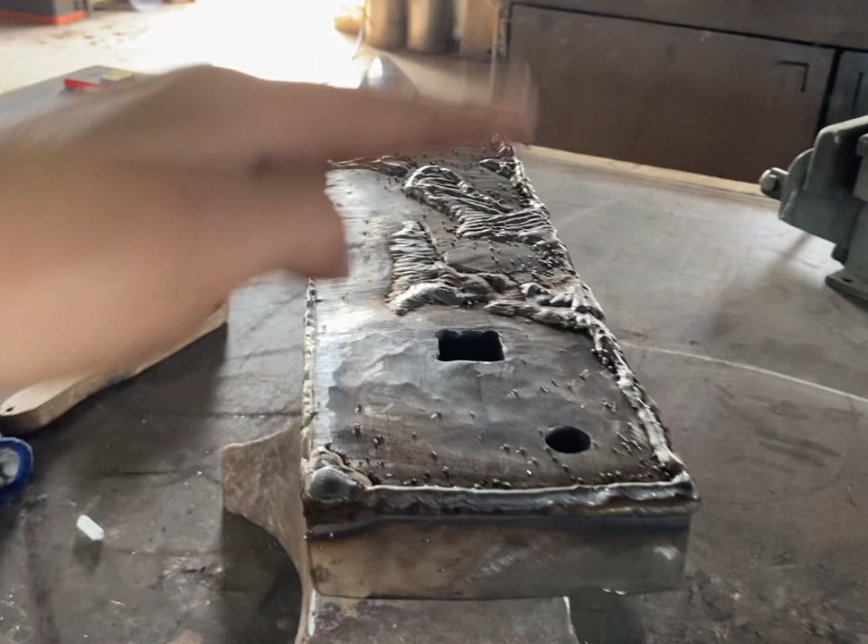I'm going to just do this with a big grinder quickly. I'm going to stand on the table, just take it down. I'll film that, and then I'm going to just start running beads. I'm probably going to just run beads along like this, just so that it's not as long of a bead, and then I'll just weave it in as well. I just want one pass on top. I'll probably do 2 passes here, but everywhere else I'm just going to do 1 pass.

This stainless wire is welding much better than I thought it would. I'm not really having much of an issue with it, so yeah, I'll do that. And then on top of that, again, I'll just flat any high spots if there are any. I'm going to try and weld nicely so that there's not any excessive high spots, and then after that, hard face on top of that, and then that's what we'll grind down.

As you can see, I haven't taken much down, very little over here, just a little bit there, basically just until my disc touched the original face, and from there I'm going to now start doing passes. So over here I'll do my first pass around here, and then I'm going to go over the top with everything else.

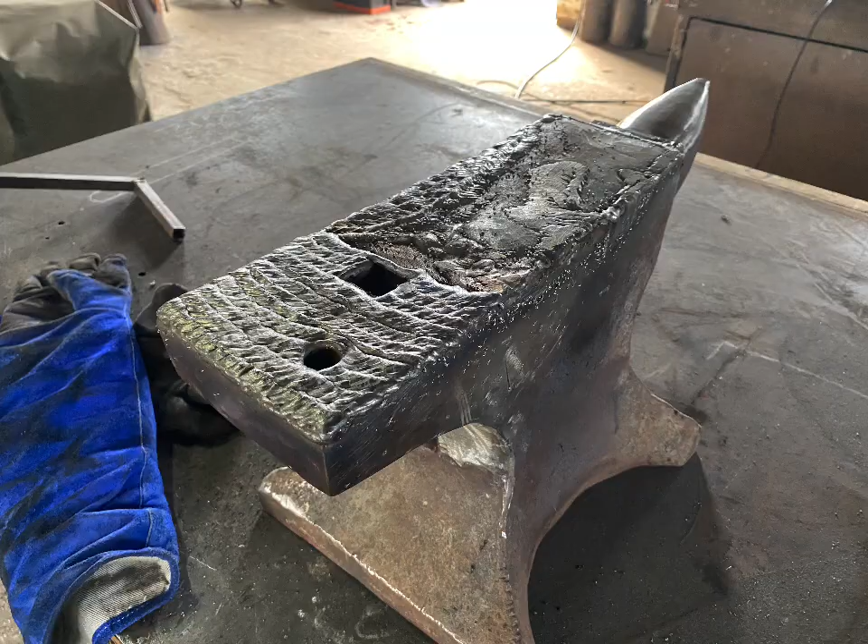So that is the stainless filler done. Did all the passes on the face, and then I just did a pass around the corners just to build it up. You can see there's a high spot here. That's where I did those 2 passes. I did the pass underneath, and then I did a pass on top. So there's a little bit of a high spot over there.

I'm just going to take that down with a grinder, just on the small angle grinder. I'm just going to take that down a little bit so that when I put the hard facing on, everything is going on pretty much flat. Yeah, I'm happy with this. I don't have to prep this at all. I can just go straight over the hard facing as soon as I've just ground that little bit. So let me get a little bit of chalk, and then I'll show you guys what I mean in a second.

So looking at it in the light, see, it's there. That's it. That is the bit that I need to take down. So I'm just going to quickly whack that off with the grinder, and then I'll set the arc weld up, and then I can start running hard face.

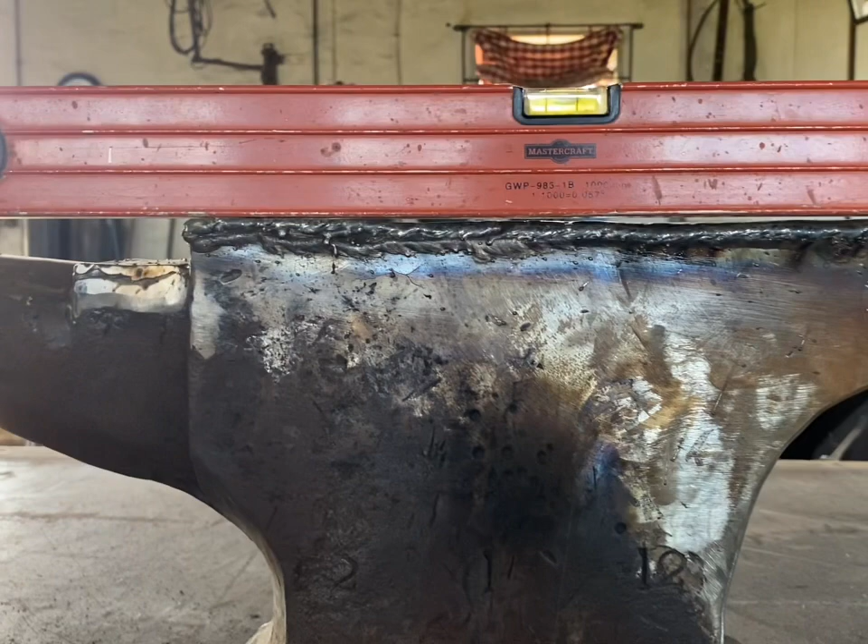I just took it down over there, and then I just went over with a grinding disc just to get all the high spots flat. And then I thought I'd put the straight edge on. Glad I did, because I have got a gap there. So what we do now is we grind a little bit off there and a little bit off there, and we might have to put in a pass or 2 there, but I don't think I'll have to.

So I'm just going to take down over here, there, there, then on this side. Middle I'm going to leave. Don't want to take that down too much. So that's that. That's what we're going to take down. I'm going to just take that down with a big angle grinder and see how it goes.

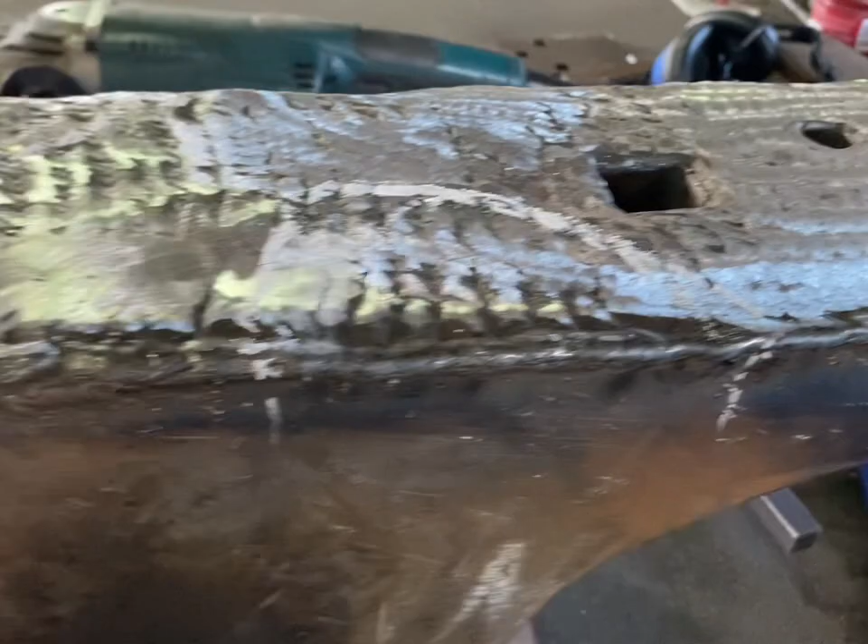I've taken it down over there and over there, and I have to build up there by that chalk line, and a little bit here by this chalk line. You can see there, a little bit of a hollow, the rest of the gap is good. And then this chalk line over here, you'll see there's a bit of a hollow rising, the rest of the gap is good. So I'm gonna quickly just give it a real quick pass over there, and then we're good to go for hard facing.

Satisfied here, now I can start hard facing. Very small gaps, less than 2 mils, so I'm happy. So I am done, I'm finished. Hard facing is done. I built the cutting table up just a little bit more. I did another 2 passes, well 1.5 was low here, so I've done 2 here, 1 at the back.

And I thought it'd be nice to actually step it up from the horn a little bit, especially because I obviously built up another 2 passes onto the face, so that it's not such a big drop from the face to the cutting table. But there it is. Have a look at that top flat. Frickin' awesome. So now we'll slow cool it in the sand, same as always, and then I will clean it up as I get time and gaps between things.

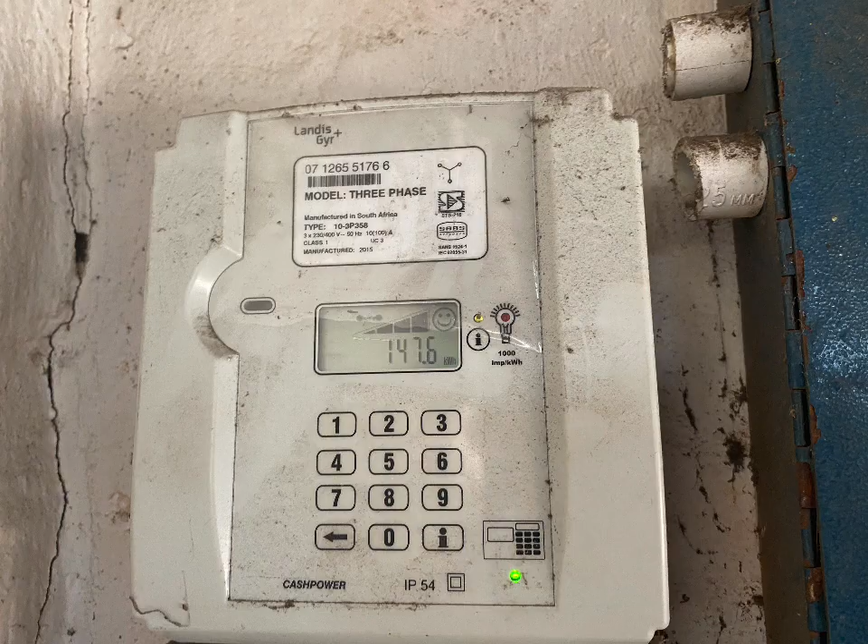So just thought I'd make a start at this. I flattened this down. This is nice and level. Just so that you guys know, this table is perfectly level, but what is not level is the feet. Remember, I have to still take down that foot over there. I know from working on my table and when I welded this that everything was level, and I welded relatively level. So all I'm doing is I'm just getting everything flat, then I will do the foot so I can get level, and then I'll work the face from there.

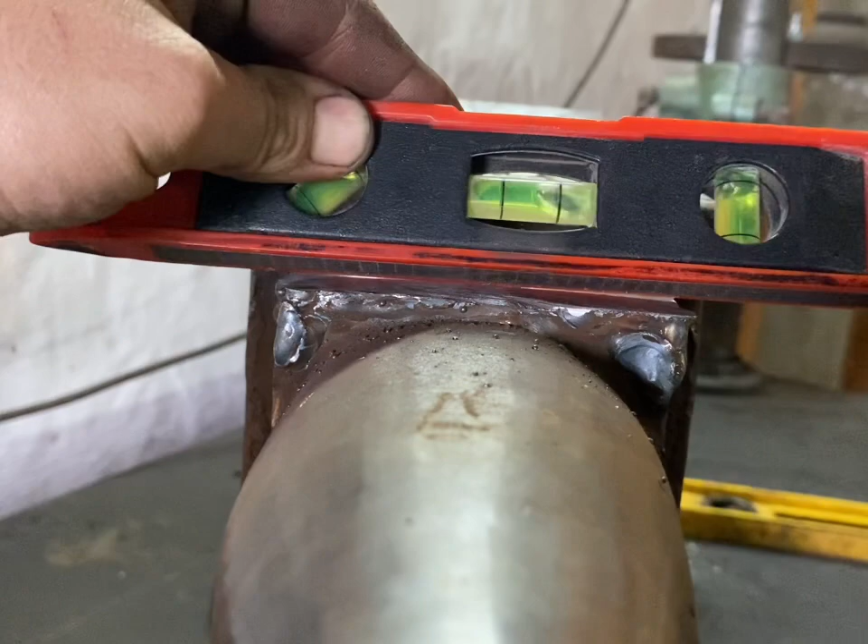But you can see it's not terrible. Obviously I've got all that movement there, which is on the feet. But yeah, you can see just from the gaps underneath that cutting table is nice and flat. There's a tiny bit over there, but if I have to, I'll just weld that in. I don't need a preheat for that because this is mild.

I just started grinding off all the high spots, but this is why it's so important to get it as close to perfect as possible before you hard face, because you can see I have almost no gap the whole way through. So all I now need to do is work this down until my lowest point is worked out, and then it's done. It's exactly the same as anything. If your prep work is good, the end product goes quick, and it's perfect. But if your prep work is bad, then obviously you have issues in your finishing.

So the feet are sorted out. You can see there's no more rock at all. No more back and forth, which is great. It was only about 3 mils, so not much at all, but enough to create some issues.

You can't put a level on the side of the anvil, because a lot of them are like this, where they go up that side and then up that side. So it's not like they're perfectly flat on the sides. They weren't made perfectly flat on the sides, these wrought iron forged anvils.

Okay, so let's have a look at the face. The face is level right the way through, which is great. And this side over here is off slightly, but you can already see where the high spot is over here, because it's smooth, and then obviously over here there's a lot of lows. I already know that that's a high spot, and this just confirms that.

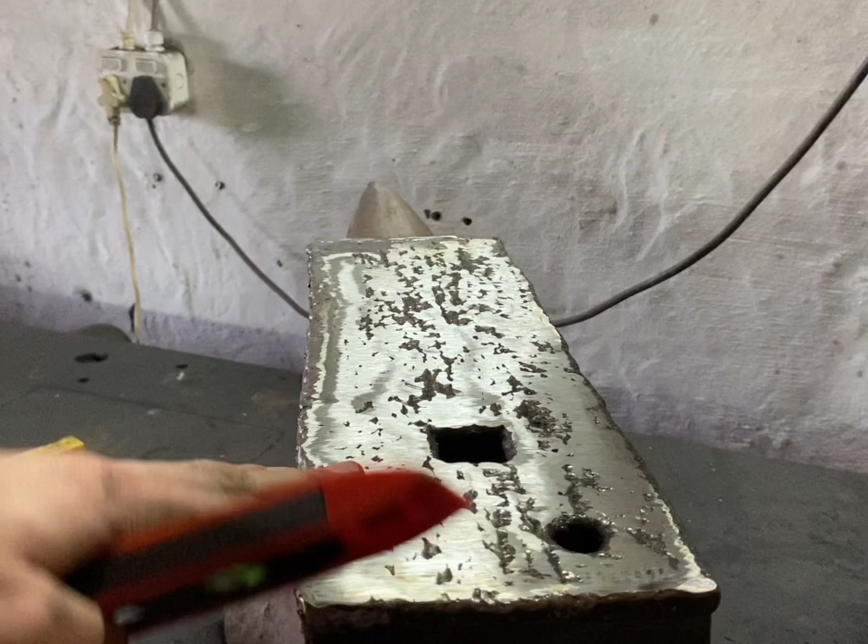There we go, that's my gap. So it's like 1 millimeter out, which means that I have to grind this 1 millimeter lower than the rest of it. So what I'll do is I'll work this back and forth, just a few passes, and then I'll just start working everything down together. But this is how you dial it in.

It's not very difficult. You just have to keep on using a level. Make sure you have a level surface to begin with. So make sure your base is level so that everything else stays true.

So I've put the cup grinding wheel in, so I can start on that now. I may still change back to that grinding wheel just because that takes off a lot more material than this one. But I'm looking to just get a flat surface now, and this gets it perfectly flat. So as soon as I've got a flat surface, I can then see where my highs and lows are, and then I can put that grinding wheel back on, take more down.

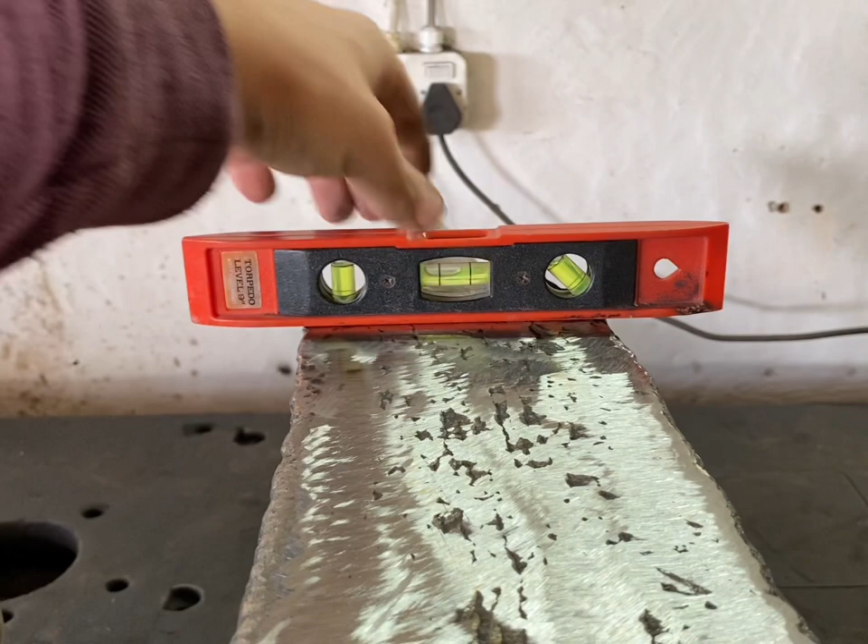I'm pretty close to level, which is good enough for me. There are some spots where it's a little bit out, but I can see there I need to take down a little bit over there. And then the cutting table is also pretty good. You come down also a little bit more this side, but it's getting there. I'm happy with the gaps, really good gaps, nice and level.

So we just carry on now with a cup grinder, give that a few passes, and then see how we're going from there. But generally it does come together quite quickly now. All we're doing is taking down all the high spots until we get to the lowest point. Just carry on taking it down. I mean, if we take the whole face down by 1 mil to get to the lowest spot, which I'm guessing will either be that one or that one over there, it's not much at all.

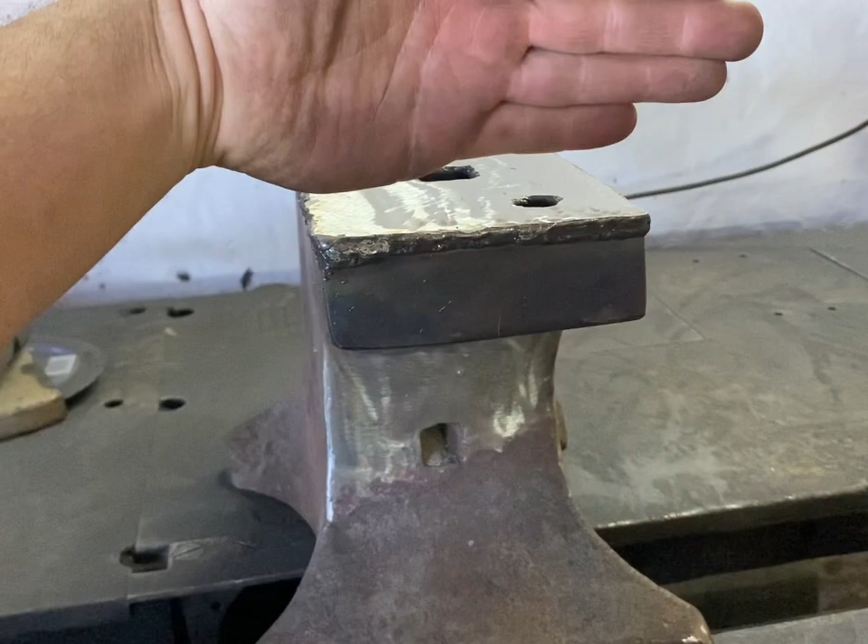Everything is looking good. Got all the marks out, most of them. See there's a little bit here, a little bit of a low there. But this is all done with the big grinding disc. I'm gonna now put the cup grinder on and just finish this off. We're getting it. It is slightly crowned this way. I'll show you guys after I'm done with the cup grinder, but it's completely level lengthways of the face. So very happy with that.

I haven't ground this off because when you're grinding, you do score the edges slightly. So I leave the build up, do the face, and then grind off the edges so that you don't have very rounded edges. Then you can get exactly the type of edges that you want. So leave the excess over there so that when you do slip up like there, you're not stuffing up your nice crisp edges. Grind that off afterwards, and then we've got nice crisp edges. So that's how that works. Cup grinder time, and then looks like it'll be done.

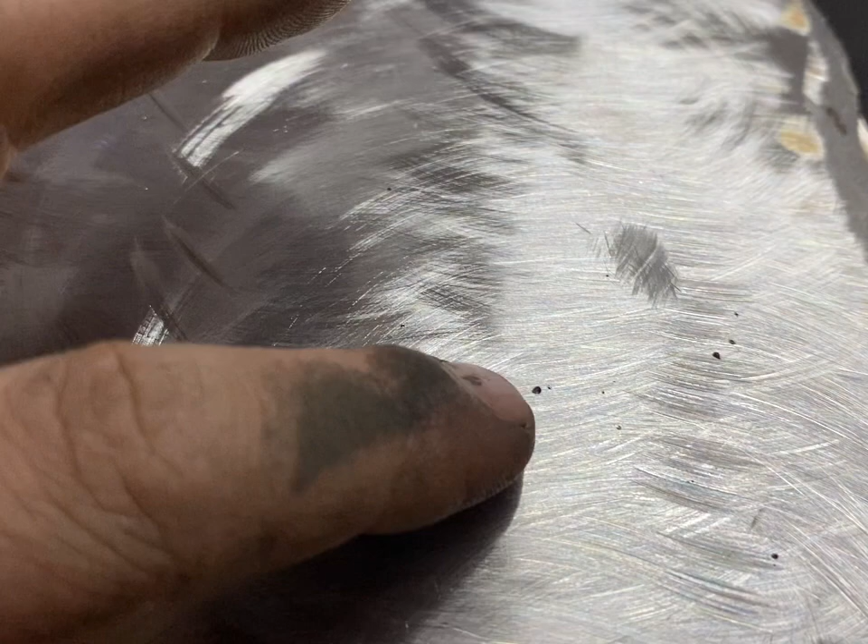We're getting real close now. You can see the uniform grinding pattern. You can see around the pritchel hole there's a little bit of a low spot. You can see the difference in grinding pattern, and then a little bit here and there, and then it's pretty consistent. There's a tiny bit there, and then there's a bit of a low there and a bit of a low over there. You can see from welding there are some very small little holes, but I'm not going to worry about that. They are very small.

So I'll carry on grinding until I've worked out those lows as much as I can. But I mean, that's a fraction of a millimeter. You can barely even feel it with your finger.

All that's left to do now is to polish the face with a belt sander, get it nice and flat, and clean up around the Hardy hole and the pritchel hole. Do that with a die grinder. But there we have it.

All the edges are sanded down, or ground down and then sanded, just polished. Cutting table is done. Horn is just polished. I did polish it before, but I got some burrs on it, so I just went over that again. But yeah, there it is. Haven't even checked this yet. But yeah, I'm just checking for flat.

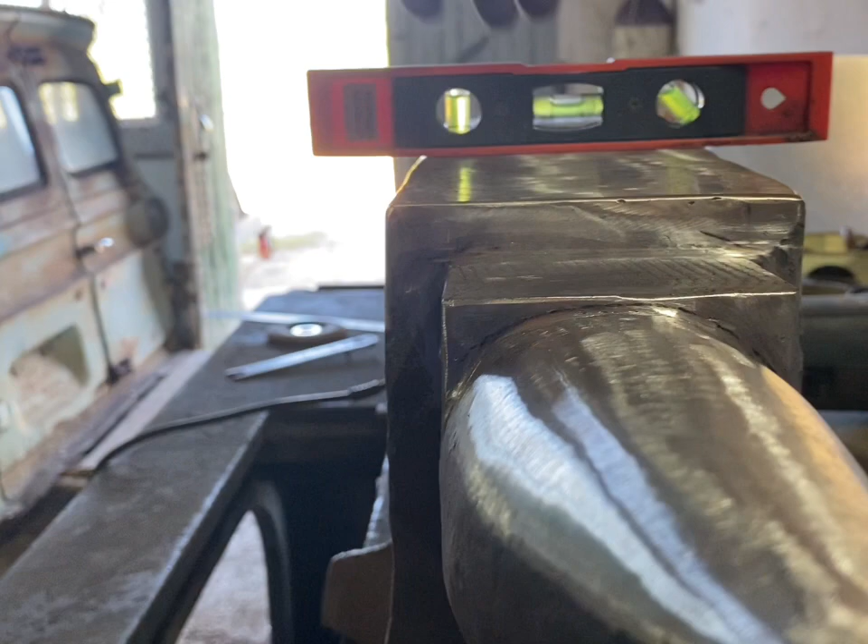Nice and flat. The face is perfect. Perfect right through, which is really, really nice. Let's just see this way over here. No gaps at all, and that follows right the way through. So yeah, all that's left now is to just clean this up.

There are still very, very tiny bits from welding. Just to give you an idea on scale of these little dots, this is a scriber. So you can see the size of those dots compared to the smallest tip on the scriber. I don't even think that the factory face was polished to be this good. There's quite a few there. These are the biggest ones that there are, but still completely workable.

And there's a very small blemish over here, right in the cutting table. That's just from a weld bead, you know. But see how nice the cutting table came out just by me building it up those last few passes. Just gives it its definition, you know, it's just defined.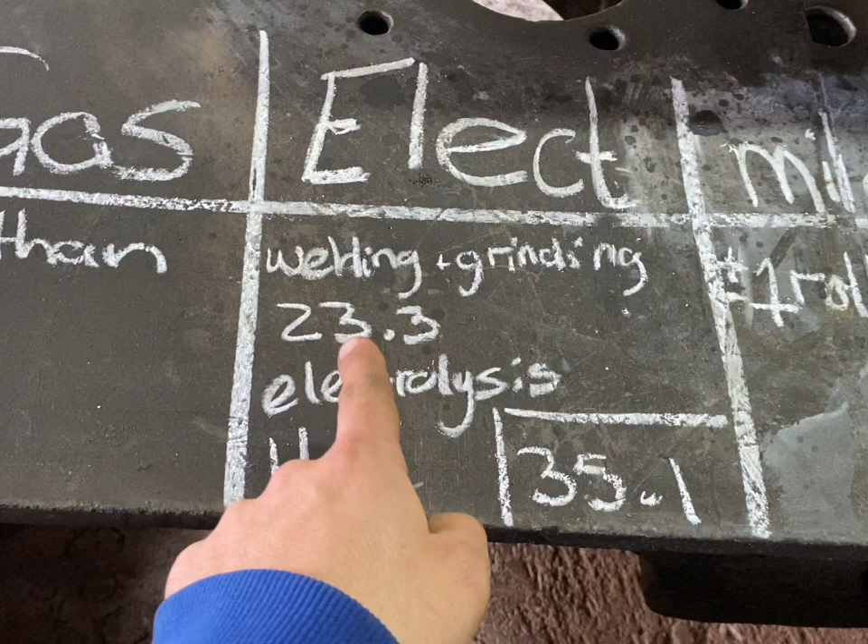I've just made this chart on how I've done my costing. So gas we used out of our gas chamber, but it would not have been more than a 9 kg bottle. Just said less than 9 kgs. Factor into your cost that you're going to use a full bottle. You're not going to run over that price. Electricity, welding and grinding, I used 23.3 units. And the electrolysis, I used 11.8 units.

I found the MIG welding machine used substantially less units than the arc welder. When I did the hard facing on the top and then the electrolysis, that's when I used the most electricity. So it seems the arc welder is quite heavy on electricity. And then mild steel, I had a roll in, I changed the roll and I've used some of that roll. So worst case scenario, factor in that you're going to use a 15 kg roll. I don't think I used 15 kgs in this anvil, but I factored that cost at 15 kgs.

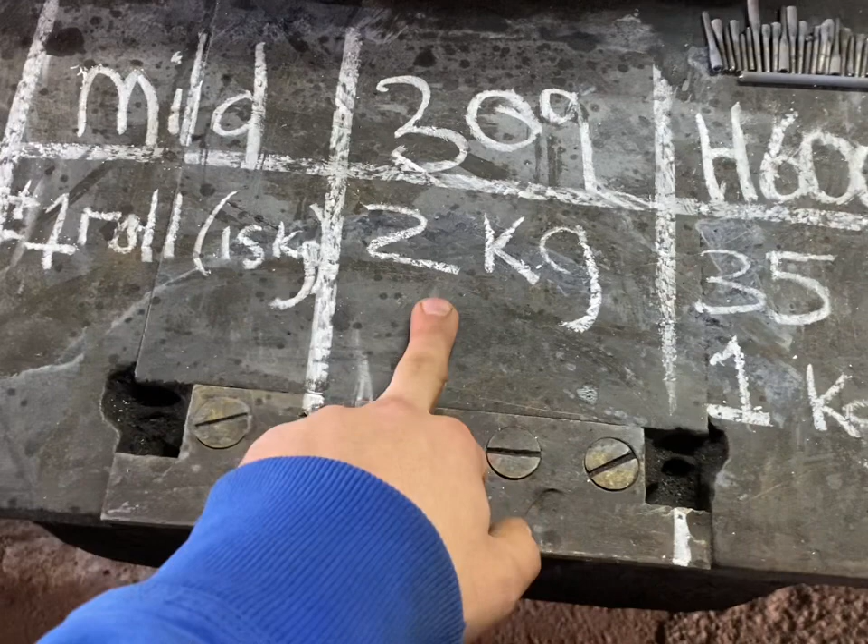The 309, it was a brand new roll, so I know that that roll was 15 kgs new. I weighed it and it's 2 kgs lighter. So that means I used 2 kgs of the stainless rod, and then I used 35 hard facing rods, which comes to a kg.

My abrasives, this was sort of just a guesstimate because I actually didn't keep count, and like you guys saw, I used old grinding wheels to get in tight corners and stuff, so I've just worked on an average. Cutting discs, I probably used about 4 small ones. I know that I used 1 big one when I cut the heel, the bevels and stuff like that. So I've just done that.

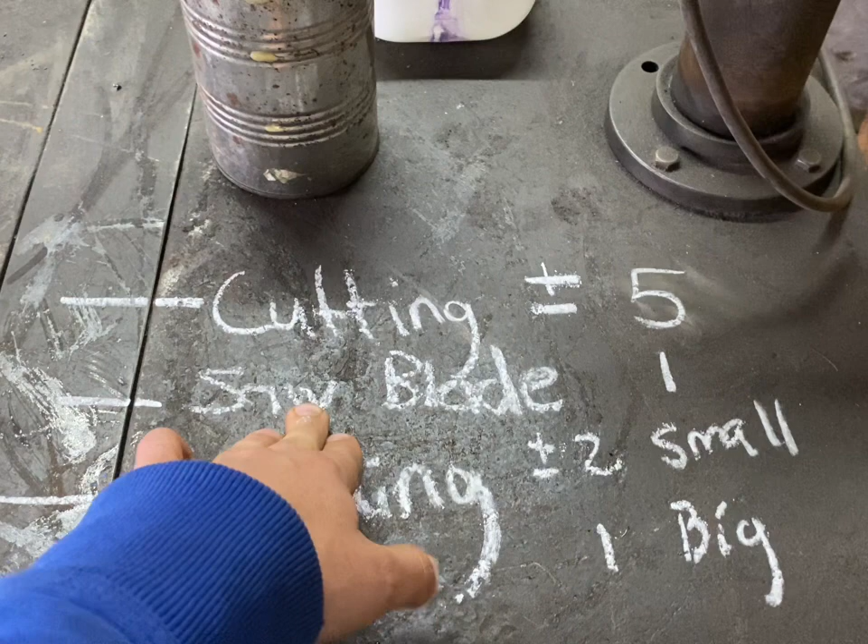This was the power saw blade. This was actually the most expensive part of all my abrasives, and that was only due to my ignorance that it broke. So I factored that cost in. Grinding discs, I probably used in total 2 small ones, and I used 1 big one when I was doing all the prep work, and then obviously the finishing I used a new one, but I didn't use a whole one, if you know what I'm saying.

If you started off with a new big grinding disc, you'd still have some left. And then all my cup grinders and stuff, those lined up over here, I still have a lot of life left on them, because I don't do grinding with them, I just use them for flatting. So those last me a long time, so I'm not even going to factor that cost in.

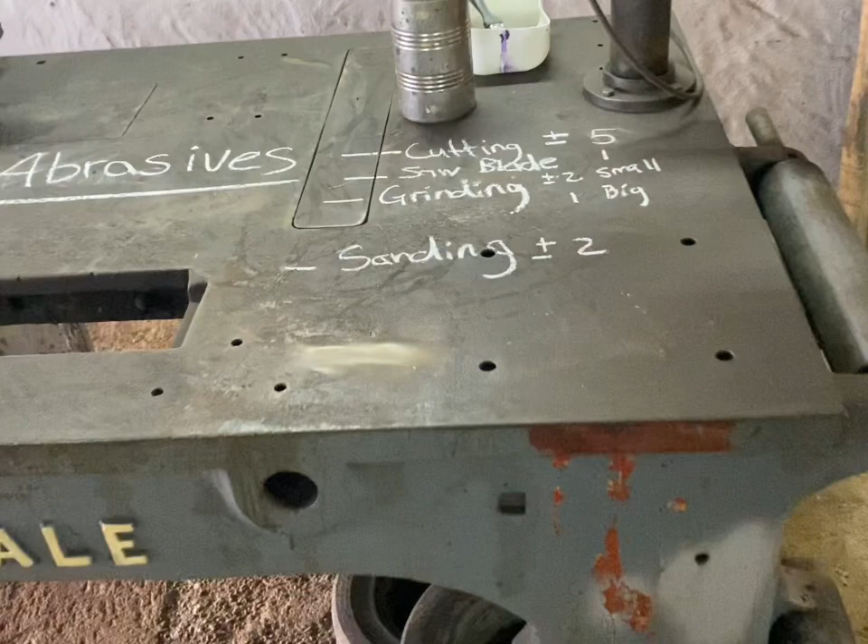And then sanding discs, which are just flapper wheels, I've just done 2. I don't think I'll use 2, but worst case scenario, I'll probably use 2. So there we go. The belt sander, I didn't even factor that cost in because that belt is still perfectly fine. I can reuse that, and it'll probably end up being eaten out by wood or something else that we're doing. Okay, so I've got here my pricing. I've got South African rands, and then I've got British pounds and US dollars.

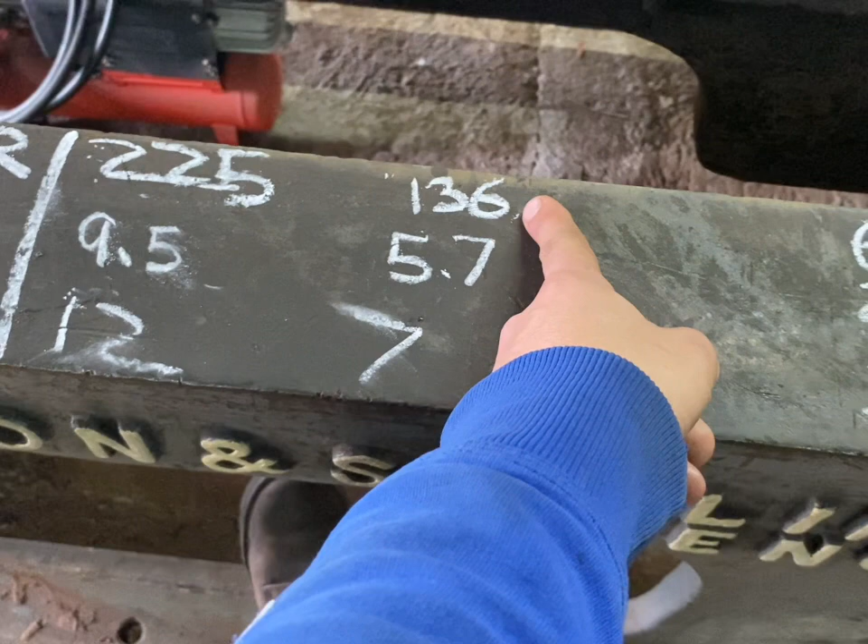Okay, so gas. A full 9 kg gas bottle is about 225 Rand, depending on where you get it from, which is 9.5 pounds, $12 for gas. Electricity. Now, this is also depending on where you live, but I used a total of 35.1 units, which comes to 136 Rand, or 5.7 pounds, or about $7. I've just averaged up on the dollars because it was all higher than 0.5.

Mild steel, a roll cost me 675 Rand, 28.6 pounds, $35. I used 2 kgs of stainless wire, which is, I just divided. I said 15 kgs, so it was an X amount for the whole roll. Divide that by 15 times by 2, so that's how I got to that price. So it's 250 Rands worth of welding wire.

10.5 pounds, $13. Hard facing rod, I used 1 kg, which is 60 Rand, 2.5 pounds, $3. And abrasives, I just averaged, it came to just under 500, so I just said 500 Rand for abrasives. So that's 21 pounds and $26. So that's what it cost me. I quickly just worked out my totals. So a total of 1,846 Rand, which you can't even buy an anvil for. 77.8 British pounds, or $96. So that's what it cost me to fix this.

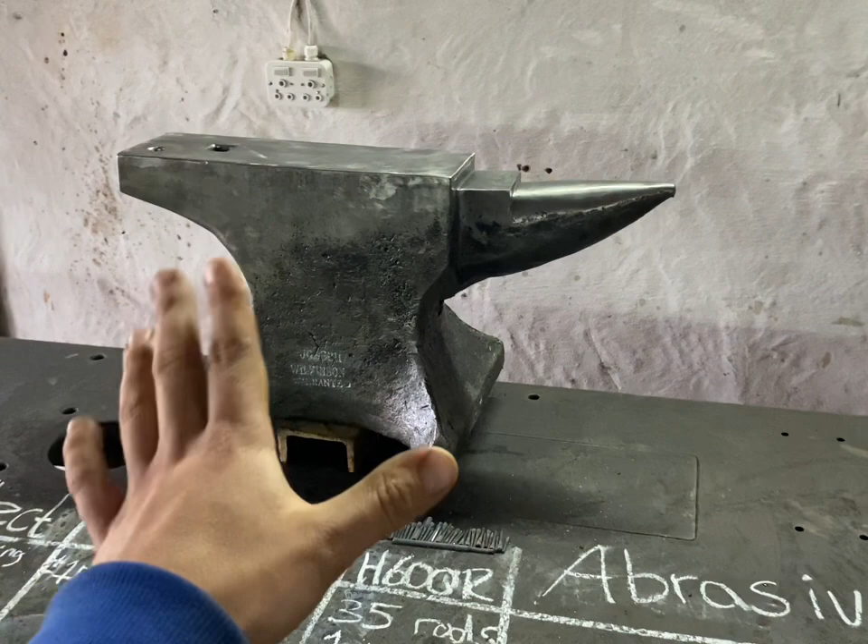So I paid 2,500 Rand for this anvil when it was broken. A friend of mine transported it for me, so I had no transport costs added in that. It cost me 1,846 Rand to repair. So in total, I've got 4,346 Rand. You can't buy a damaged anvil for that price here locally. So total, it cost me 183.8 pounds for that, completely restored. That's my cost in that anvil, or $225. So that's a really good price.

That is my cost in it, but obviously I haven't factored any time. If I charge out for time, like I said, 6 months on and off in all my spare time, that's what I've been doing. So definitely not worth it if you factor time into it. But this is a labor of love for me, so it's completely worth it. And I can sell this now for at least double what I've got in it. That still doesn't cover my time, but I'm not doing this to make money. I'm doing this because this is now a usable anvil that someone can enjoy. So that is what it costs to restore an anvil.

There we go. I will just attach a little bit of footage after this of me beating some nice hot steel on here as soon as the linseed oil is dried a bit, just so you guys can see that the heel is not going to just fall off. I have had a lot of questions saying, are you sure the heel is going to last and stay on? Well, I did a full penetrating weld on this, so it's going to be stronger than it was before, definitely. So there we go. That answers your question.

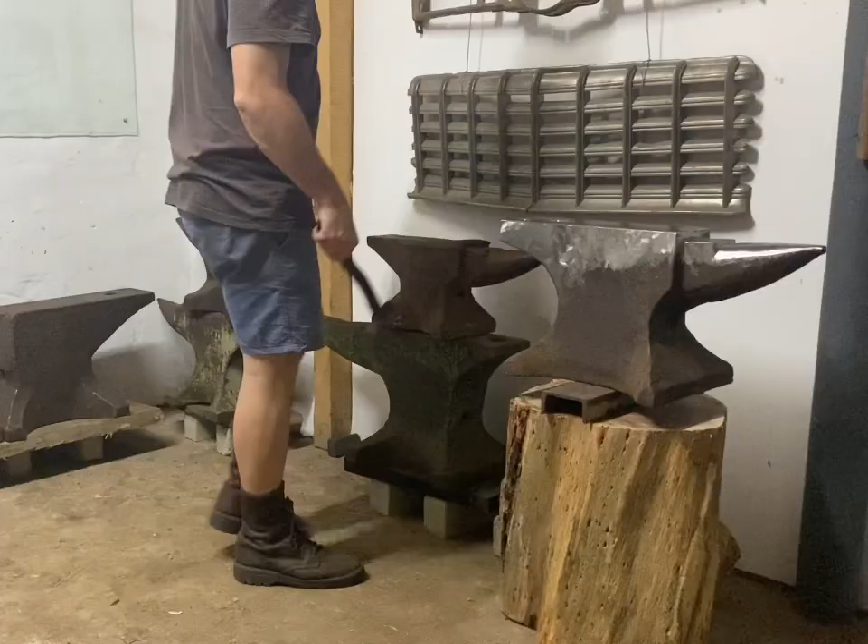I'll attach a video after this of before I dipped it. I had it in the room here with the other anvils on a stump, and I tested the ring. I closed all the doors so that it could resonate nicely, so I'll attach that here. So as you can hear, that thing rings like a church bell, which is really nice. So now just for forging a little bit.